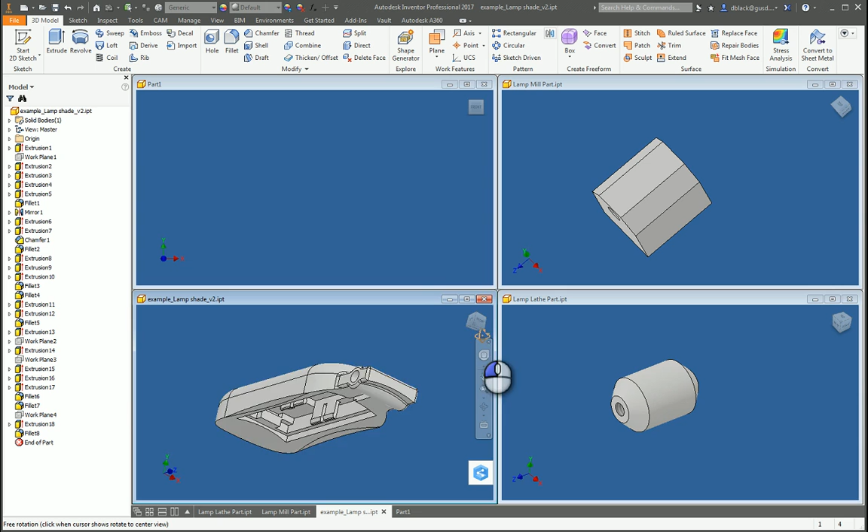Today we'll be designing the sheet metal structure of our lamp project, and you can see that we already have the lamp mill part open, and that model is provided, and we have the lamp lathe part open, and that model is provided, and we have the lamp shade that we've recently designed. And if you haven't designed yours quite yet, that's okay. You can still get started on the structure and then add the shade in later once you have it.

So with a brand new part file, let's go ahead and start designing the structure of our lamp. So I'd like to just start with a sketch on the front XY plane, and I think what I'll do is base my lamp link arms off of the design from a slot going center to center.

Now, you're certainly free to design the structure of your lamp in any way possible using any of these geometry features. We are going to be laser cutting it from thin steel or aluminum, and so long as you stick with a two-dimensional flat design, anything you can draw, we can cut it. But I'd like to keep this very simple for my project, and you can certainly bring in quite a bit more creativity to your project.

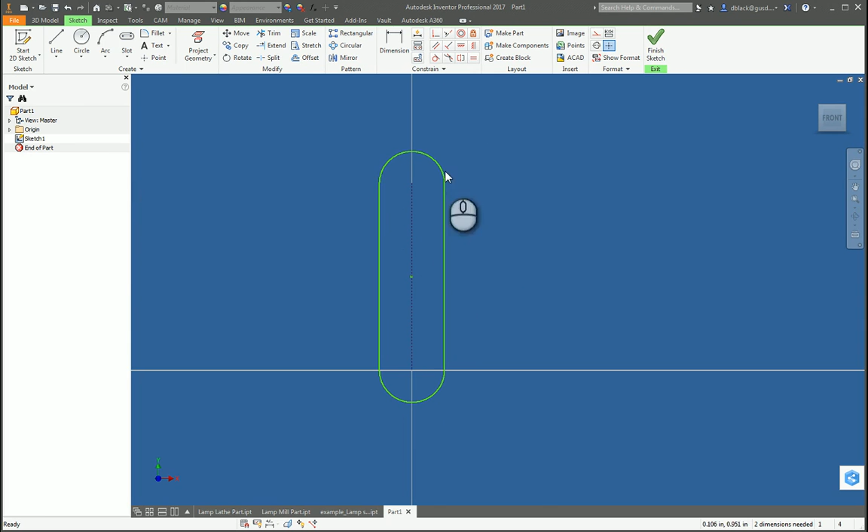So I'm just going to get the basic shape down of the link arm, which is this slot feature, and I'll go ahead and bring in a couple of circles to each end of the slot, and I'll draw them a little bit different sizes, but I know in the end they're going to be equal, so I'll apply an equals sketch constraint to these, and I'll go ahead and give them a dimension of 0.27.

I think that'll work well as a clearance for a 1/4 bolt, which has a major diameter of just under a 1/4 inch, 0.25, so 0.27 should clear that nicely. Now, for the size of the link arm, how big should we go? Let's keep it reasonable. I'm looking here at a ruler in front of me on my desk.

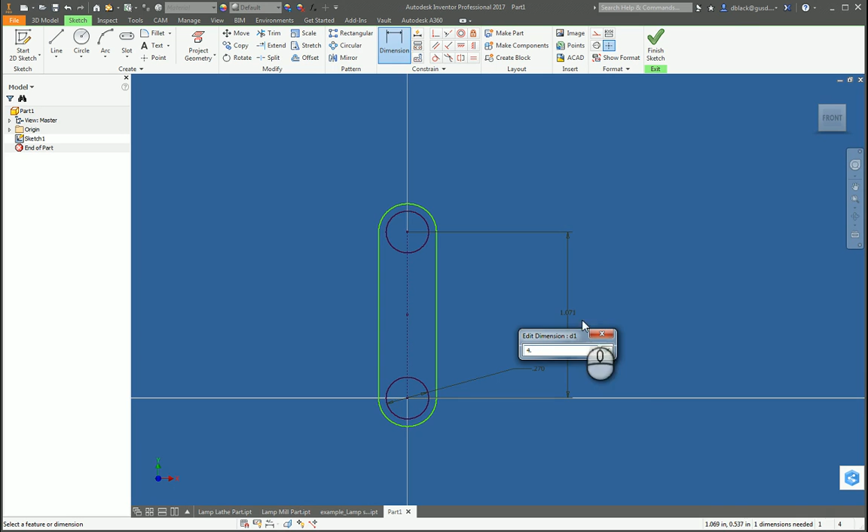I think we'll start out with about 4 or 5 inches or so, and we'll see how it goes from there. I'm thinking maybe a couple of 4-inch link arms will ultimately give our lamp a height of somewhere around 8 inches or so, which should be good for the size of LED module we're using. So there's 4 inches center to center, so overall the link arm is coming out a bit longer than that, and we can go ahead and give it a width here.

And again, looking at the ruler or caliper in front of me, I think a good size for the style I'm going for with my lamp is going to be somewhere in the neighborhood of maybe 1 inch or 1 1/4 inch. I think I will try 1 inch. And we'll see how that turns out.

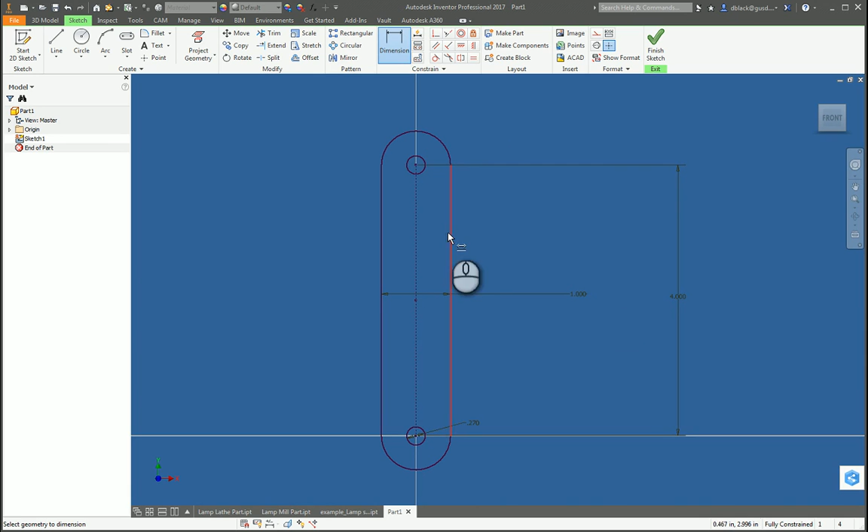Now, already I'm getting a little concerned that these ends are bigger than what may fit up with the mill part and my 3D printed lamp shade. I'm not sure that I've left enough space to have that big of a radius down toward the end. So already I'm starting to rethink this design. I might go for a narrower slot shape, or alternatively I might go for a little bit of a different design altogether, which is what I'm thinking at the moment. So let me go ahead and delete the slot features.

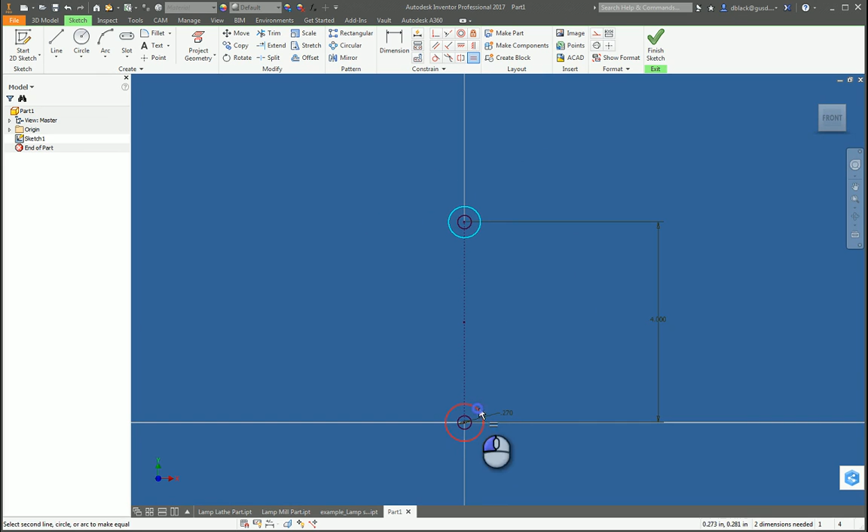So really the essence of what I've started with is 2 holes, each of diameter 0.27, and they're located about 4 inches apart, which looks good for our size and scale of design. So next, I'd like to bring in a couple more circles at those same centers to give me my outer profile. So I just made those equal, and I'd like to keep those in the neighborhood of maybe 0.5 or 5/8, 0.625. I think I'd like to try that.

And I'm getting some ideas about the style of my design. I'm thinking that I'll use lines, and I'm going to snap this line to the circle, but I'd like to not snap it right to this side point here. I'd like to place it at more of an arbitrary location on the circle so that I can use constraints later to bring it in the way I'd like.

In fact, I'll do that up here, and you can see it's chopping through the circle a little bit. Let me use a little bit of a different technique down here. For this one, I'm going to drop that line just out in space, trying not to snap it to anything whatsoever.

And I'll go ahead and do the same things over here. In fact, I think it might be simpler for me to just drop them out in space like this. And I'm going to come back with some tangent constraints. Tangent is just a nice way to make everything smooth and aligned. A lot of engineered and well-designed products have tangent lines and curves. That one looks like it went in nicely.

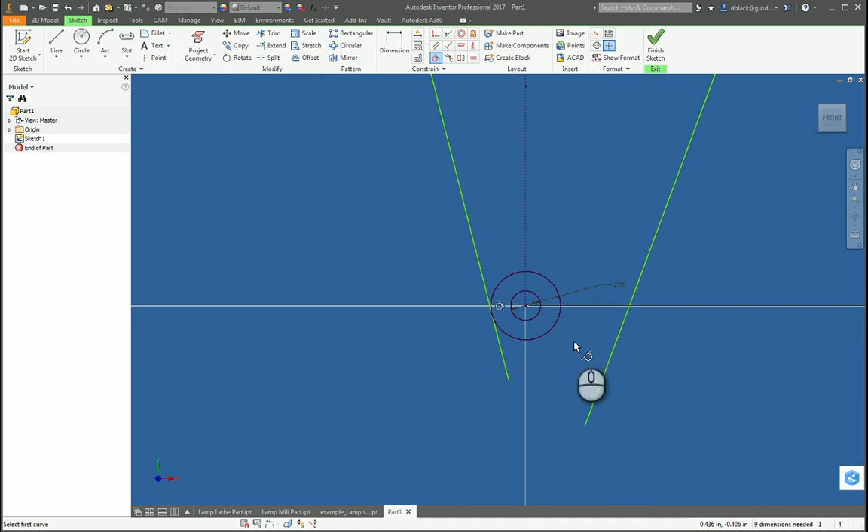You do have to check sometimes to make sure that you're not cutting across the circle with a chord as a segment of your line. I'll go ahead and make this one tangent, and notice I drew my lines a little bit longer than the circle, so I'll have to come back and trim them later, which is not a problem. And we're making everything nice and tangent here, and that looks good. So we'll come in with the trim tool, which is keyboard shortcut X, and we'll just trim all these right to length.

So I'm getting an idea for this sort of diamond-shaped link arm that's maybe narrower out here toward the ends, 5/8, and perhaps wider in the middle, so it's a beam. And I haven't decided really if I'd like to do something sort of abstract like this, or if I'd like to kick it back in like this, almost in more of a boomerang shape. And it looks like I might have snapped to a construction line there by accident, so I'll Control-Z a couple times on that. So I'm just taking that point and I'm seeing what I like.

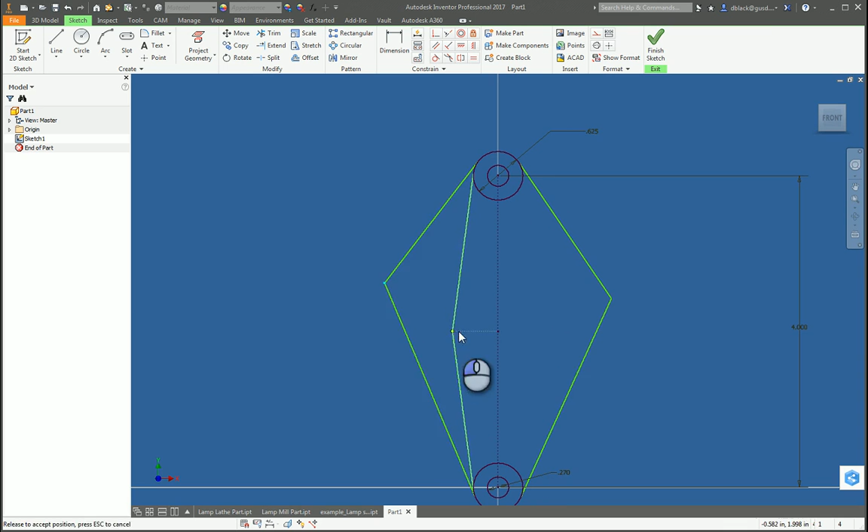It's really my choice of what design style I use to connect those two link points. We literally can put just about anything in between. I'm thinking I'd like to keep sort of a narrow diamond shape for my design, and I snapped these right down to horizontal with the midpoint of that construction line. And that construction line is an artifact that's left over from when I drew the slot, but you could certainly draw a similar such line on your own, joining your two circles together.

It should be noted that mouse snaps are actually not a hard snap. I can still move that later. So what you may want to do is come up here and use a horizontal constraint to get that center point aligned with your midpoint. And if you're on the top sketch plane, that would probably be a vertical constraint.

Next, I think I'd like to make all these equal length. Symmetry is a nice thing sometimes. So we'll go ahead and do that. And I think these might already be, by definition, yes. Adding this constraint will over-constrain the sketch. So it shows me in the lower right that one dimension is needed, and we can sort of pick and pull things apart and see what dimension that is, and it's just this way.

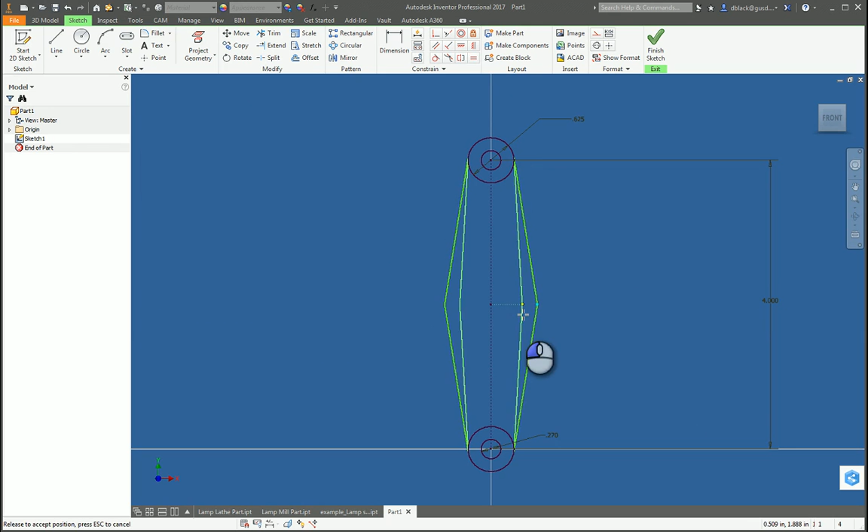So I think I'll go ahead and put a dimension that way for myself. I'm going to look again to my caliper or ruler here. Let's call it, in my design, I think I will stick with that 1 1/4 inches that I was going for in the first place. So that gives me some nice scale here. And I can go ahead and just extrude out this shape as is. It is 3 regions, so I'll have to pick it.

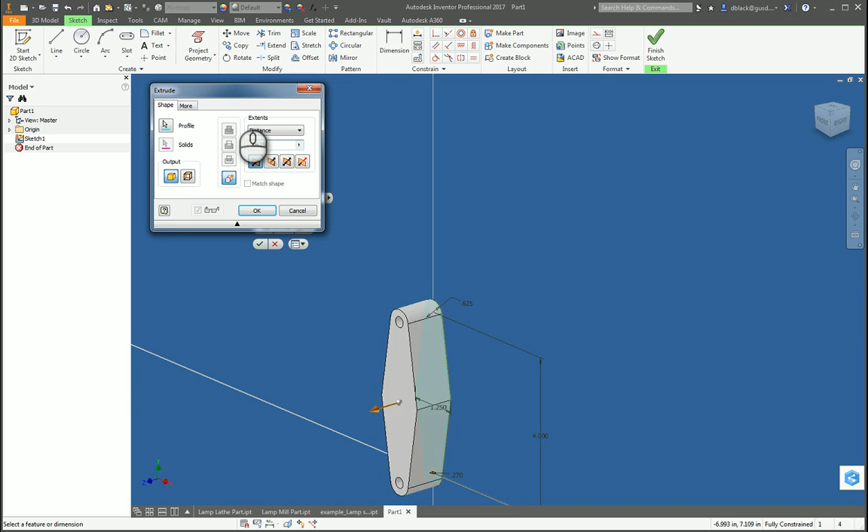Now, the thickness of your extrusion in CAD technically doesn't really affect how your part turns out in the laser cutting process, but we want to have our CAD model match the actual material we're going to be cutting. We do have 0.060 thickness steel, but chances are we'll do these link arm parts out of 1/16 aluminum, which is 0.0625. It's completely reasonable to round that to 0.063, or really even 0.06 if you wanted. This application is not too specific.

However, if we were doing bent sheet metal, we would need that perfect and consistent throughout. But I'll go ahead with 0.063 as a very close representation of 1/16 of an inch, the actual thickness of the aluminum that I intend to use for this project.

So I have the essential structure of my link arm modeled in just under 10 minutes, and it has a little bit of artistic style, but we are putting this into quite an advanced laser cutter, so we might as well add a bit more style to it. So I'm going to start a new sketch right on top of my solid shape, and it is important to not do too much in one sketch.

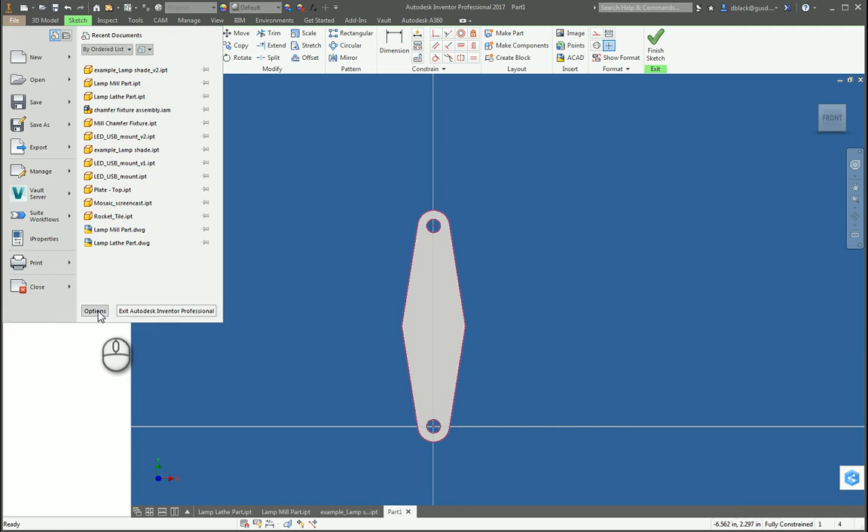I'll go ahead and project all the geometry I have, and if you haven't set those options in your application yet, go ahead up to your File menu and choose Options, and there's a couple of defaults that I'm not crazy about under this Sketch tab. By default, Auto Project Edges during curve creation is turned on, and I really don't like that. And there's another option called Auto Project Edges for sketch creation and edit.

That one's okay, but I tend to leave them both off so that I can choose which edges I want to project or include. The one I do leave on is Auto Project Part Origin on Sketch Create. I do leave it on just like this. So we projected our edges from our shape.

Now I think I'd like to potentially try using the Offset tool to keep a thin web around the outside. And I see I have that here. So it's giving me a choice of how far in I bring that offset, because I'd like a shape that is something like this. So I'm going to offset mine maybe 1/4 inch and see how that looks. And it's all locked down because it just is offset.

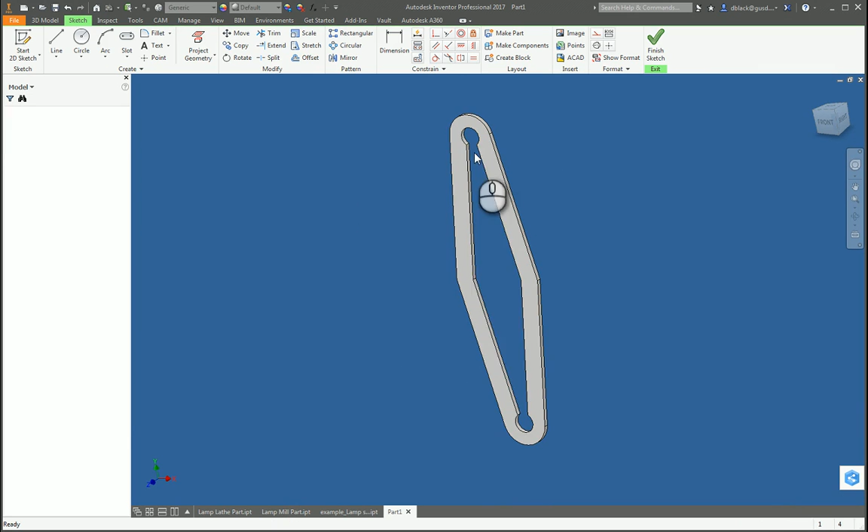Now if I straight went to extrude this, I'd have a little bit of a problem in that it goes all the way through to the holes, and I need to keep some material there for the pivot points on my link arms. So I'm going to undo that and back that up a minute. And I think what I'd like to do is bring in some more circles, perhaps even similarly to what I had before, right up to my part. That looks pretty good there.

So I can do a bit of trimming with the geometry. I'm not sure why this one is still green. It looks like it didn't do a hard snap for me. So I can go ahead with an equals and say the radius of this circle needs to equal the radius of this arc. Now everything is fully constrained, which we really like to see in good, proper sketches.

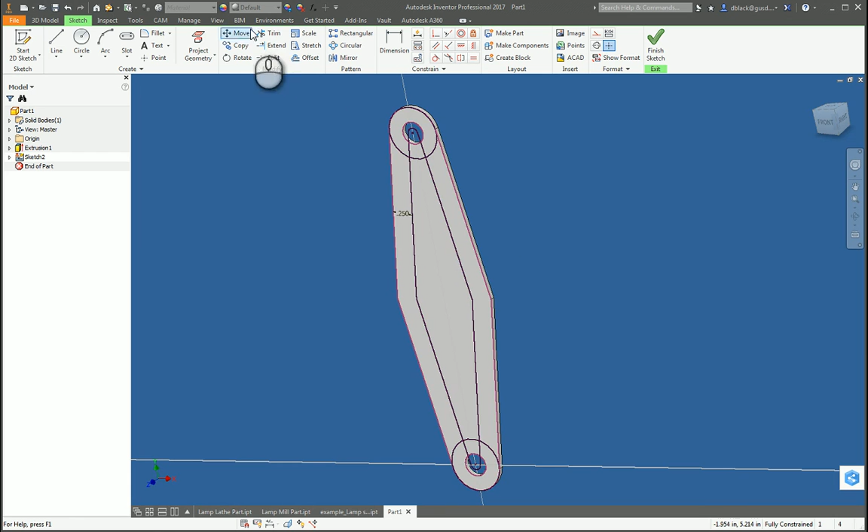So I could come back and extrude this region out, but it still looks like it's not picking. And if I hold my mouse long enough, sometimes I'll get a select other option, but it looks like right now this is my only option. So I may need to come in with the trim tool and take out some of these areas here. And we have to be careful not to move our geometry past this point, because you saw it went from black to green when I trimmed it, so it's no longer well constrained and it can move around on you.

So I'm trimming these lines. Sometimes Inventor doesn't really like extruding certain regions if the lines extend and cross others. So let's try it from here, and it looks like I can get that region through the part with no trouble. Now this looks okay. I think I would like the style of this design, and the laser is capable of cutting these sharp corners, unlike a router or something of that sort.

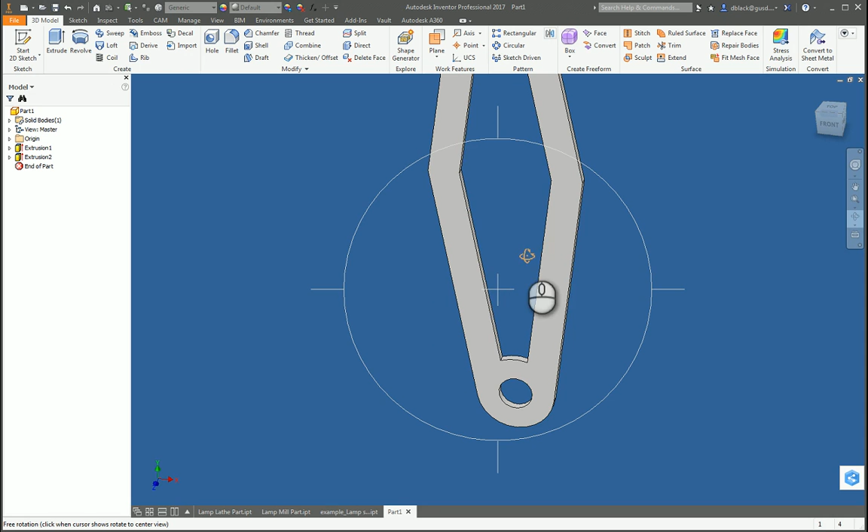But in engineering design, sharp corners do lead to stress concentrations, stress risers. So I'd like to come in and put some fillets in those corners, and I might even experiment with adding a little bit more style to the design of this part. So I'm going to do that back in the same sketch, actually. And you know, I might even Control Z back to where that was just an offset shape that was not trimmed, and I do have the circles in there.

And I think I might like to try doing some sort of pattern like a truss, like this, which I think looks kind of cool in the design. So I need to see how we might do that. I can potentially try drawing a construction line, which is not going to be a hard solid line. It's just to help lay things out, and it's really subtle in this color mode, and I'll see if this zoom in gets captured on the video. It's a little dashed line there, and they're showing up yellow in the Millennium color scheme, and I'll go ahead and draw a few more in.

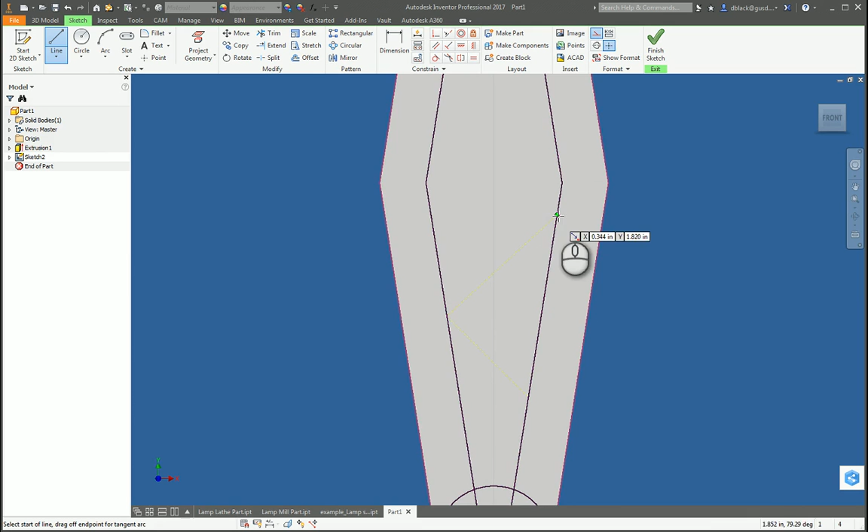And I do want there to be some sort of regularity to it. So I'm thinking the two in the middle should be equal length, and I'm thinking the two on the ends should also be equal length to each other, but not necessarily to the middle. In terms of angles, we can use a general dimension and just go from one of our geometry lines to the construction line, and I can put an angle in there. So let's call that, something similar to what I'm seeing, maybe 135 degrees.

I'm going to try to do a similar angle over here on this line, and I might bring the angle out this way and do the supplement of it, 180 minus 135, so we get 45 degrees. But that's off of a different line.

For some reason that doesn't look quite like I intended, so I'm going to Control Z that. That 35 there is closer to what I was looking for. So we have to keep in mind which line we are referencing.

Let's just, for the sake of it, look at this dimension here. Yeah, that's about 145. So I'm curious if that were 135. That just brings that a little tighter than I wanted to see.

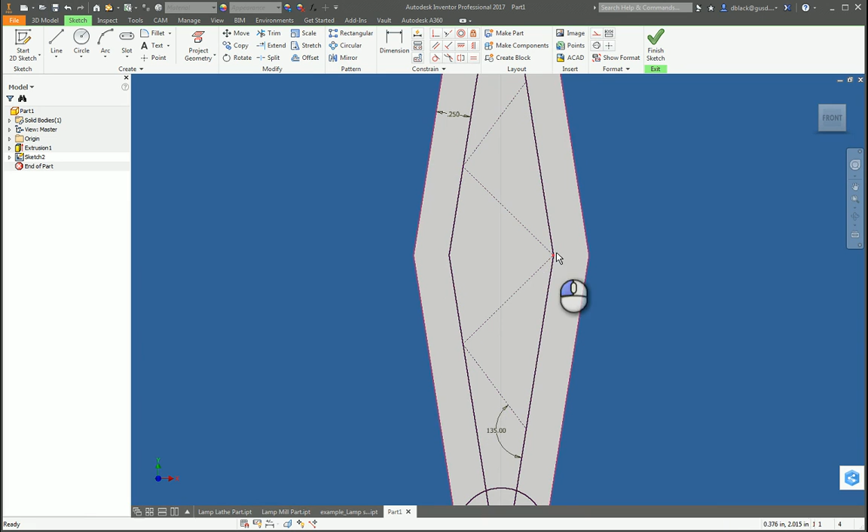So I need to rethink this a little bit in terms of how I draw it. I might just freehand it for a moment. Curious what happens if we snap that construction line there. So that becomes fully constrained.

These are super interesting, just by definition of length. So we had, I'll trace over, this construction line in red and this construction line in green defined as equal lengths. And then each of these in orange we had as equal lengths as well. So this actually ends up in a perfect symmetrical position about this yellow line, which I kind of like, and I think I might go with that.

So my construction lines are nice and locked in. Now I'd like to get some real geometry lines, so I'll turn off that construction, and I think the way I might do it is with an offset tool.

I'll offset from those construction lines over a distance. I'm thinking I might try to keep that 1/4 inch web thickness as sort of a theme throughout this part, but as I look at it, I realize the open areas in the part might be getting a little small. So before I do that, I'm going to change my 1/4 inch web to maybe simply 0.2, and that opens up the part just a little bit.

Now I'm going to offset from my construction lines by 0.1. You notice they extend a little longer, and that's okay, we can fix that. I'll offset this way by 0.1 as well. You'll notice these cross here, and that doesn't quite reach, but all of this is fixable in a moment.

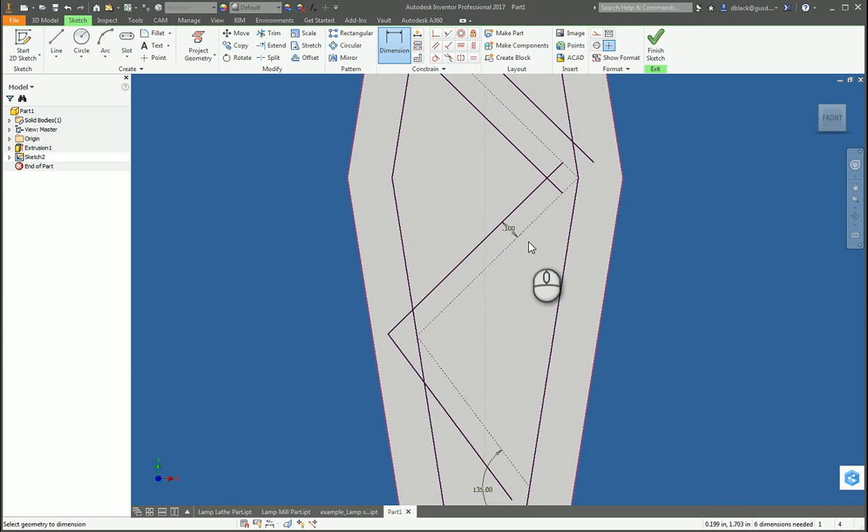So let's just continue offsetting. And I forgot the dimension on that one. We can drop that in with the D, General Dimension tool, 0.1. And we can drop our next offset line in and give it a 0.1 as well.

So this is looking like a pretty cool shape, and I'm happy with it. We do need to make these lines reach to the end, so I'm going to use the Extend tool to do that. You pick the line you want to extend, and more often than not, it'll take it right where you wanted to go.

So let's see, do we have any others we need to extend? Just one down here. You see the little highlight preview in green, and we're looking pretty good at that point.

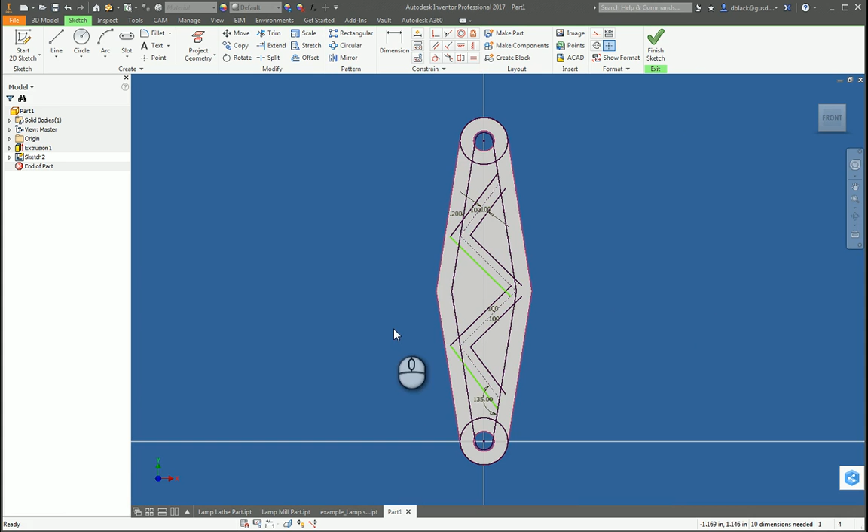Now we're no longer fully constrained, and we could certainly do some dimension work and get ourselves back to fully constrained. If this were a production part for a real engineering firm for a customer, we likely would make sure our sketches are fully constrained. But for a student artistic project, it really seems to be okay, and more trouble than it's worth to go constrain all of it.

So do know the difference. Proper practice is everything fully constrained in sketches. You don't want it moving on you like this. So we could certainly put that dimension back in, but we're going to go break quite a number more constraints here momentarily with the trim tool.

So let's go ahead and take this line out, and we want to get everything back real clean to where this will be a clean extrudable region. So we're taking these out. You have to kind of think of your design in terms of positive and negative space, what stays and what goes away.

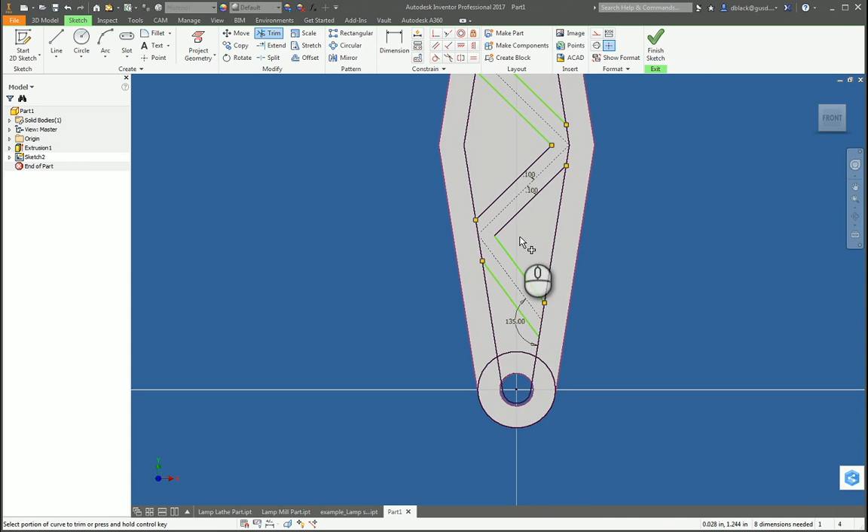Now some of you might be tempted to add fillets at this point in your sketch, and I would strongly recommend against that. It's much preferred to do fillets in the 3D space than in the 2D sketch environment.

So this looks pretty reasonable at the moment. I'm not confident that these green lines haven't moved, but we could check it with a measure tool, and indeed they're 0.2 inches apart like we intended. So this looks pretty good.

Let's see if we can extrude out. Nope, we still have that issue with that region leaking into the center where our pivot hole is. So let's do a couple more trims right up there, and now we see the whole sketch has gone green.

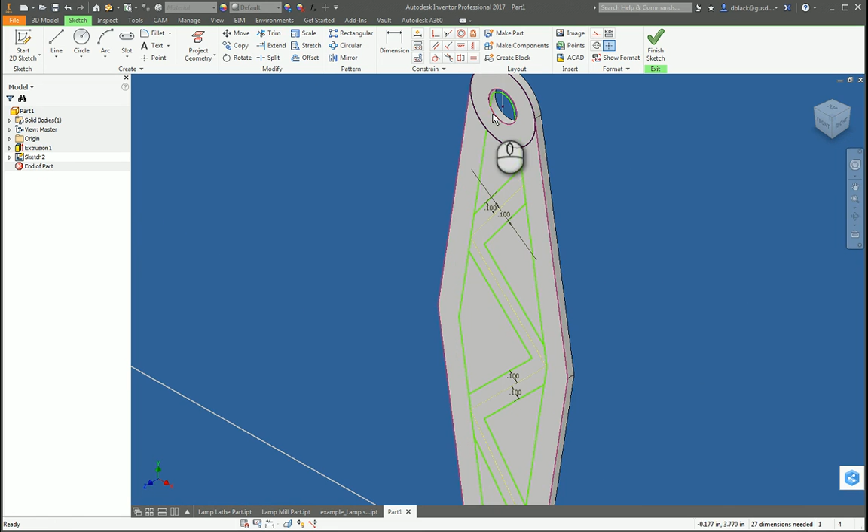So this would be quite a bit of work to bring this all back into fully constrained. It's one of those things where you draw your geometry with the constraints, get it in the right place, make sure it is, and after you start trimming, you're pretty much done in terms of being able to make future edits. It becomes quite difficult without breaking the whole sketch or adding a lot of constraints back in.

So these look like the right regions. Let's see if they can extrude. Indeed they can. Let's cut them through all, and that's looking pretty good.

So again, in a real engineered design, we would do some finite element analysis on this or something to optimize the position of the truss members. But for our design, we know it'll be plenty strong with the light loads on it, and we're mainly going for the aesthetic here. So at this point, let's go have some fun putting in our 3D fillets.

Let's just start with that 0.125 radius, and I'll get the most narrow one and see how far it brings it out. You'll see that really filled that region quite a bit, and I'm losing a substantial amount of the open areas in the model.

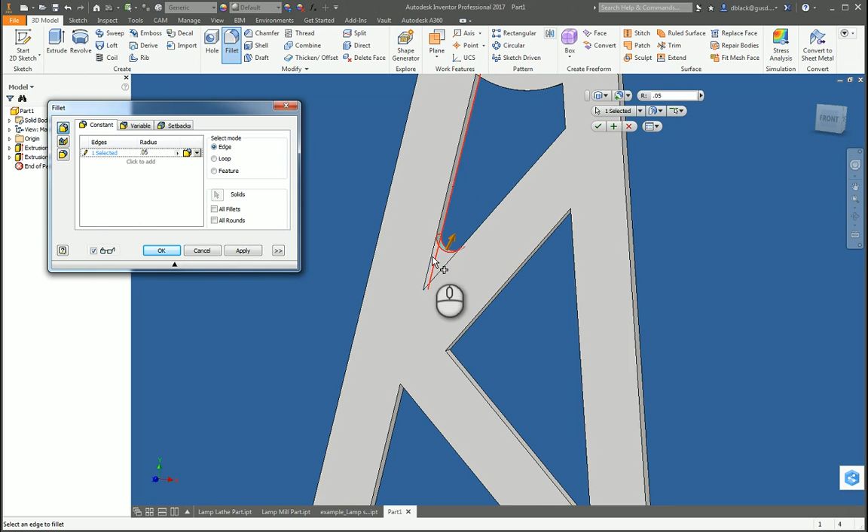So let's see if we can bring that radius back down to a little bit more reasonable number, a smaller radius, maybe 50 thou. And that gives us a nice radius but still keeps the look and appearance of our design.

So I think I'll just start putting these in. You do want to be careful about your mouse clicks, and if you hit one by mistake that you didn't mean to do, you can just hold the Control key and click that edge again. Control click is a deselect.

So just orbiting around, holding F4 on the keyboard and zooming in and out with your scroll wheel, and it'll zoom where you point it. You bring your mouse to that corner and zoom right in there, hold F4 and orbit around. You can get really good and fast at this with some practice.

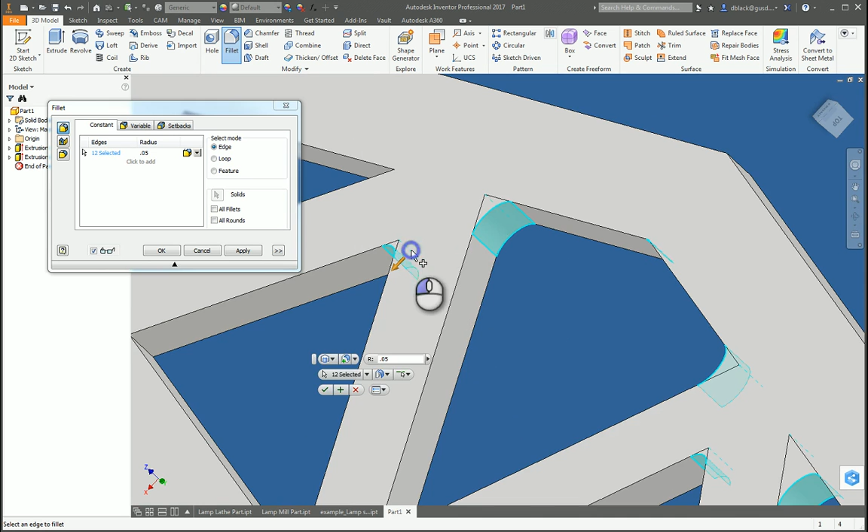So we're getting all our fillets in there. It's looking pretty good. You can even pick them through the backside like this, even if you can't see them directly, and that does work just fine.

I like giving myself a good view angle where I can pick them without accidentally selecting a different edge. And let's get this region up here.

Then you want to look at your number of fillets and say, okay, does that make sense for what I'm doing? If you got some odd number like 19 or 17, it might raise suspicion that you missed one. So you do want to look over your model, depending on your shape it could be an odd or even number, but check that it makes sense to you and that you didn't miss one, because it's very easy to do.

And we'll say apply, and that looks really great, actually.

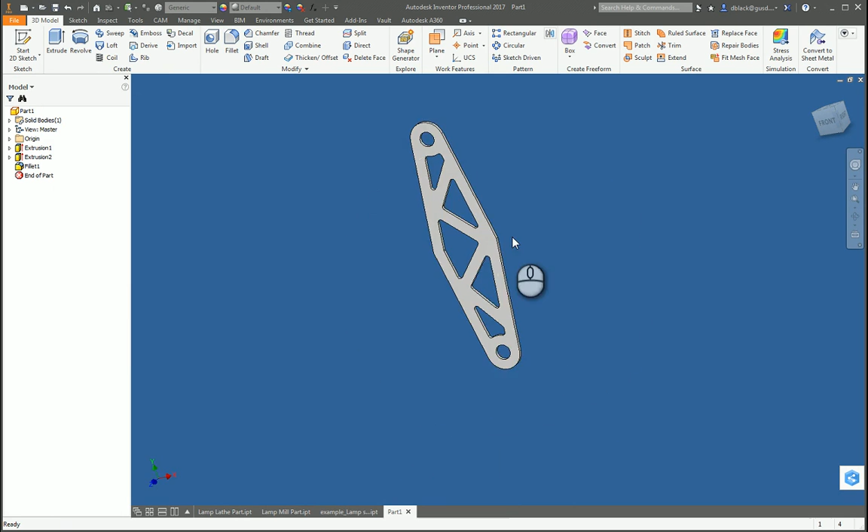The only last thing I'd like to do is put a little fillet right over these two surfaces, and I'm doing that as a separate feature because I might want it to be a different radius than what I used on the inside. You can see that's pretty small there.

Just for example, let's see what a 0.5 would look like, and I may even stick with that. I do like the appearance of that. So we have a nice truss beam here.

For the link arm for our lamp, I'm going to go ahead and celebrate with a save and call this link arm, and I'll give it a V1 just in case I come back and revise this at some point in the future. Let's go ahead and tile our windows down here. So again, we have our mill part, our lathe part, our shade, and yours might not exist yet, but that's okay. And I've got my link arm.

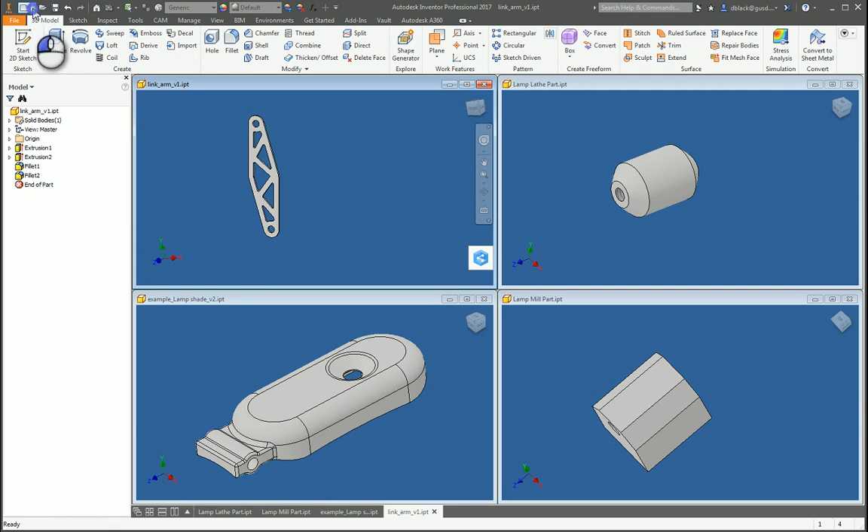The next thing I need to do is design the base of the lamp. So let's do a brand new part. Everything that's an individual part in real life does need to be an individual part in CAD. That's just a good modeling workflow. So we'll start a new sketch, and for orientation's sake, I'll go on the top plane, which looks to be the XZ, and it does rotate it 90, which is a little goofy to me, but we'll go with that.

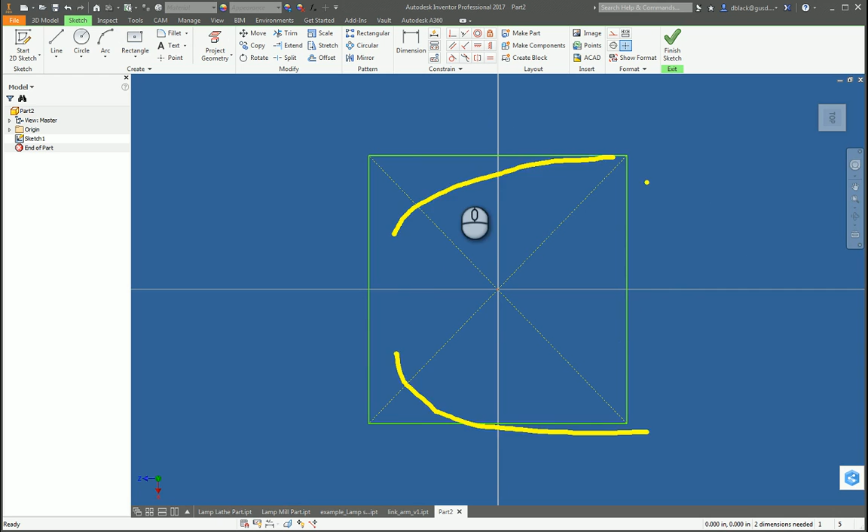We can do a lot with our shape of the base, and we can put some customization in there. I would say a center point rectangle is really basic. You could do some sort of wavy shape like this, maybe something shaped like a gear or a cam or something of the sort. You could bring a little style into it by curving some part of it. In fact, as I look at that, I think that might be neat if I brought in a curve shaped sort of like this. I think I might give that a try on my project.

But we can start with a rectangle, and I'm thinking a size of 4 inches ought to be adequate. And I would like mine to be basically square. Yours doesn't have to be, but since I'm going that way with mine, rather than putting a separate dimension over here, I'm just going to use an equal constraint from my sketch constraints and make that right into a square. I'll go ahead and extrude it out a distance of 0.06 or 0.063.

I haven't decided yet if I'll be going with steel for the base or aluminum, but nonetheless the DXF we export has no thickness, so either way should be fine in your model. You just want it to be reasonably accurate.

So let me try to do that sort of cutout shape by starting another sketch, and we'll project this geometry so I have it, and you see that as the dark purple or medium purple lines here in the Millennium color scheme. And I'm thinking I want to use maybe an arc to do it.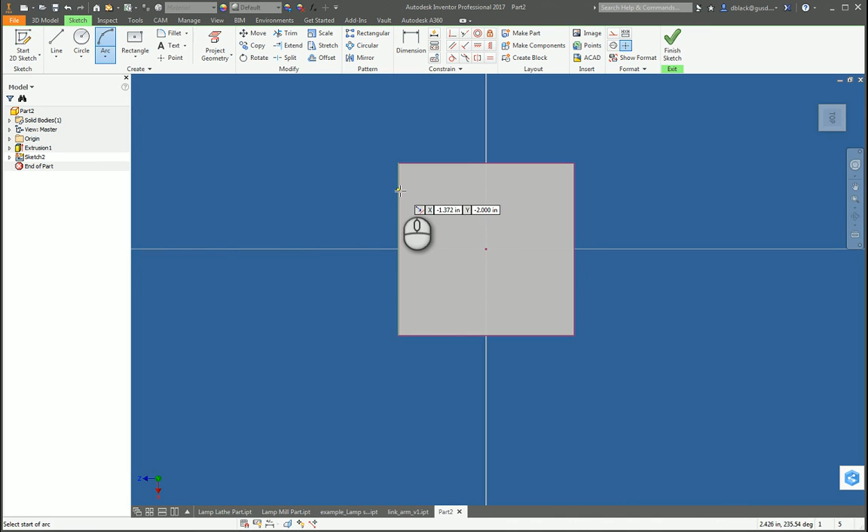So let's see if I were to anchor this here and here, and I was hoping for something more like a parabola. But a parabola is not a constant radius, so the arc tool won't do it, actually. That won't be suitable. There could potentially be a way to do it with a couple different radius arcs that are tangent to do some approximation. Splines I wouldn't recommend—at some point in the process, I believe they get converted to lines and arcs when we go to laser cut.

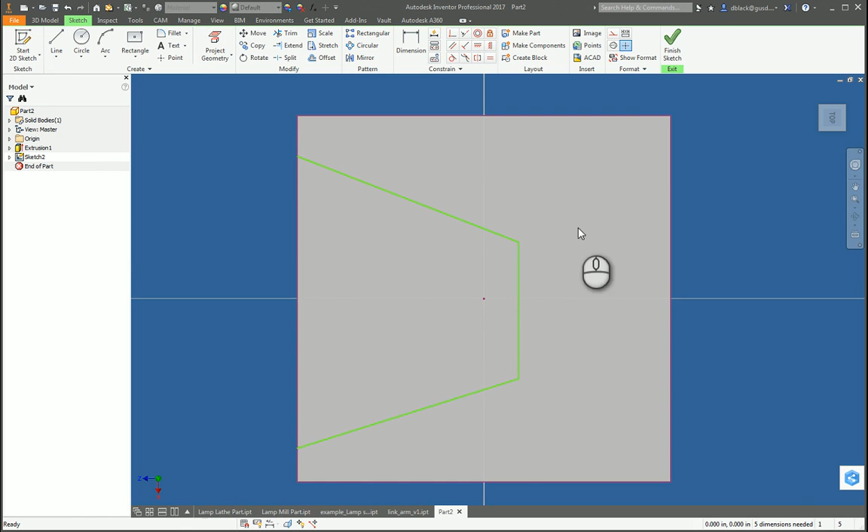So I might rethink this and just go with lines for a bit of a harder edge shape to my design, something like this. And what I'm looking at is this line really can be anywhere, and I need to control that. So I'm going to use one of these constraints, either horizontal or vertical, to get the center point of that line aligned with my sketch origin about which my square was created. So in this sketch orientation, the top is rotated, so it's actually vertical ends up horizontal as we look at it on the screen, and that looks pretty good.

The next thing I'd like to do is make sure these lines are equal length. Symmetry is a nice thing. And now we need to put some dimensions to it. So from this front edge, I'm going to come back, let's say 2.5 inches, and I'd like this line to be maybe 1.5 inches wide. Let's see what would happen if we took that back. No, I think I'll stick with that. I do like how that looks.

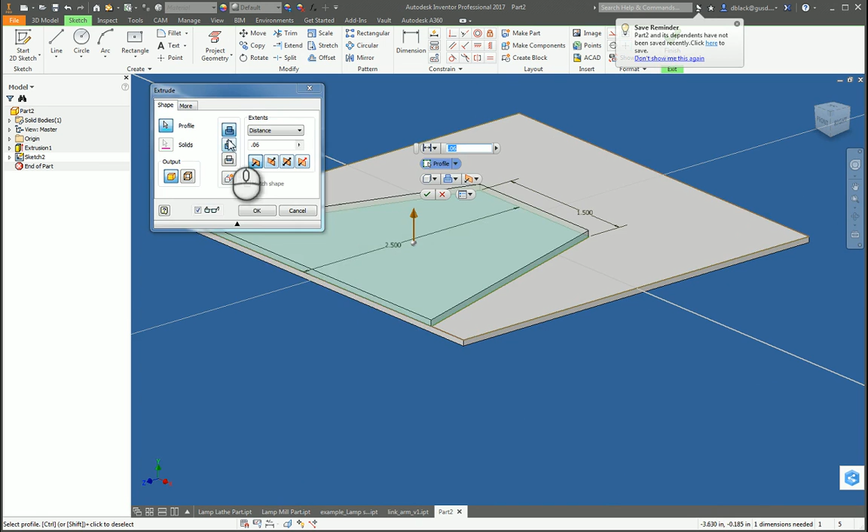So I'm pretty happy with this. Let's see if we can extrude cut it out. That looks pretty good. So I can do some more—I can put some fillets in it, or on it. Whoops, not the whole feature. Fillets is what we were going for there, and we can certainly pick them. The sheet metal cut to a sharp corner is going to end up pretty sharp, so you do want to fillet your edges to some degree.

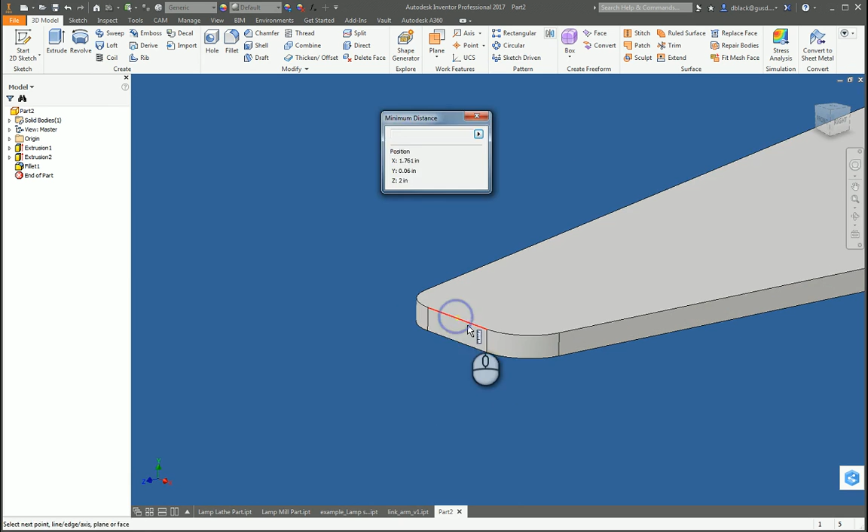Okay, and I like what I see. So something like this is going to be the base for the structure, rather, of my lamp. Now, I want to measure the front part here. Whoops, M for measure. 228. I do have some little rubber feet we're going to put on there. And I'm thinking that maybe should be a little bit wider so I can get those rubber feet all the way out toward the front. That's hardly a 1/4 inch wide.

So let me go back to my sketch. And in fact, we are not quite defined on that yet. So let me put in one more dimension from the side to this line here of, let's try 0.5. And with our fillets, that should leave us a good 282 in that region, which I think is just fine. So I kind of like the design. It's looking pretty good. I'm going to go ahead and celebrate with a save, and I'll call that my lamp base V1.

Okay, we're almost ready to build the bulk of our lamp here. So we now have our lathe part, our mill part, our link arm, and we'll have several copies of that. And then our base and our shade, perhaps, if you've modeled it already. If not, that's okay. So at this point, I feel like we're ready to make an assembly. So I'll make a new assembly. And to place the parts, I like to just tile the windows and bring each one in there.

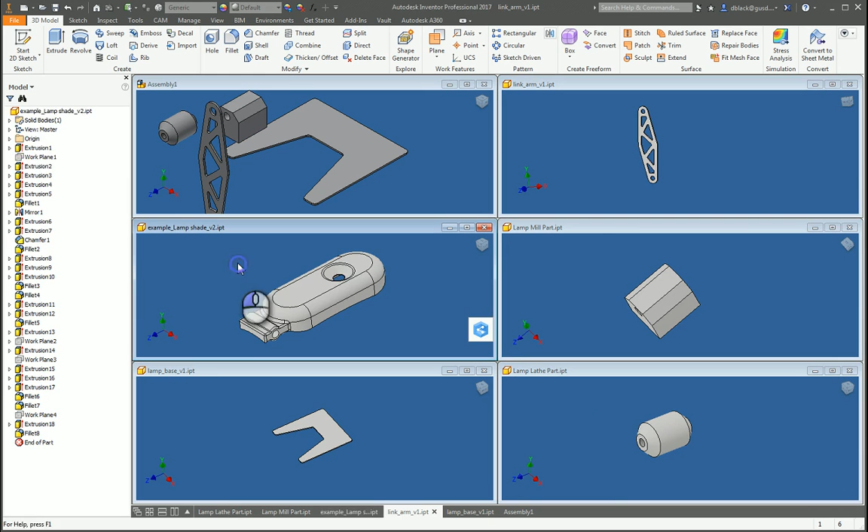So we'll start with the base, and we'll just drag it from the browser, and that's now in our assembly. We'll get our mill part, and we'll drag that in. We'll get our lathe part. We'll drag that in. And we'll get our link arm, and I can put a few of those later. And I'll get my shade. I don't need it yet, but we'll need it eventually. So I got all my parts placed in, and I'll come back to my assembly. Alternatively, you can use the place tool, but you'll have to browse for it.

The first thing I want to do is get some of these out of the way. But then I really want to join the mill part to the base. So I'm thinking that I need to ground the base, which it already is, as indicated by this little push pin icon. And then I need to use a constraint to select the top of the base, and I'll orbit around and select the bottom of the mill part, and I'll say apply.

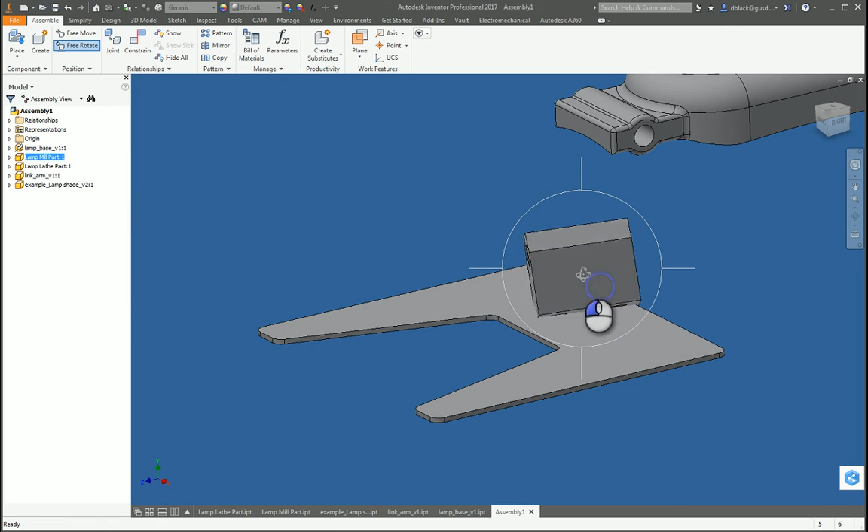The next thing I need to do is get the orientation right. And I need to get them kind of lined up. I want this thing spun around this way and sort of centered toward the back of the base of my lamp. So I think what I'll do is actually mate this flush with the back edge. Now, if you don't have a straight edge on the base of your lamp, you'll need to do something different with where you constrain it to, and I will leave it up to you to make that work.

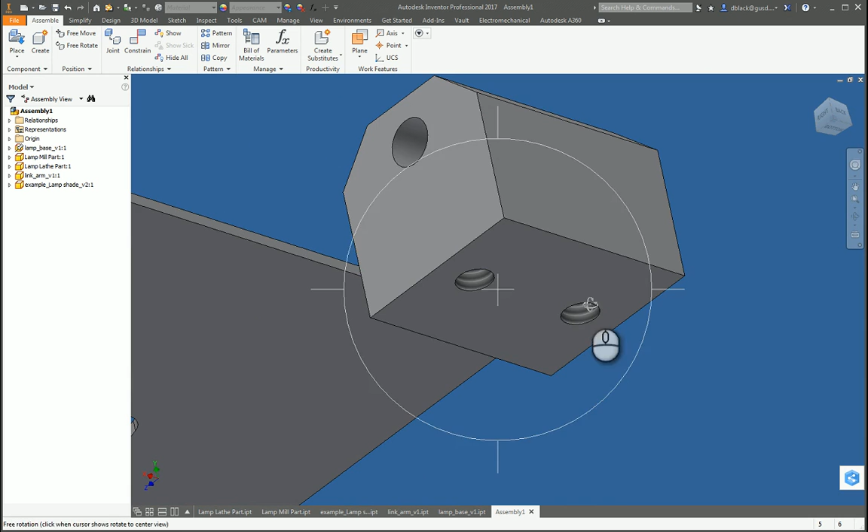One technique is, let's move this out of the way temporarily. Oh, that's not moving for us. Let's move this one. You could model the couple of holes in your base plate that are a match to the mill part, and I believe that's 0.7 on centers. Yes. So if you did that, then you could constrain right to the holes. I didn't know exactly where to put the holes when I was designing the base, so I'm going to get the mill part all constrained in and then model the holes adaptively.

So we want this centered. The best easy way to do that is with a work plane. So I'm going to open the mill part. In fact, it's already open, but that'll just bring us back to the right tab. And I'm going to give myself a mid-plane between two planes. From here, orbit around to here. Now we have that nice work plane right in the middle.

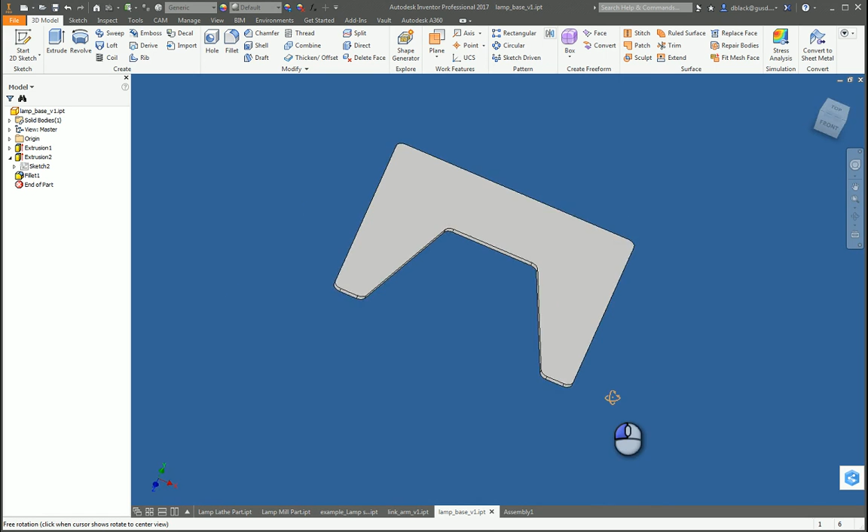Now on my base plate, I'm going to maybe do the same thing. Let's see. I have these sides as purely rectangular, which is okay. I'm not sure if I want to keep it that way or not. I'm looking at the style of this, and I can't help but thinking that this would look pretty cool if it came back about like that.

So I'm thinking I'm going to make that change now on my model. I'm noticing these fillets are no longer going to be needed. I'll just go right ahead and edit and get rid of them. Not a crucial step, but that's just part of a person's style in modeling and being particular about things like that.

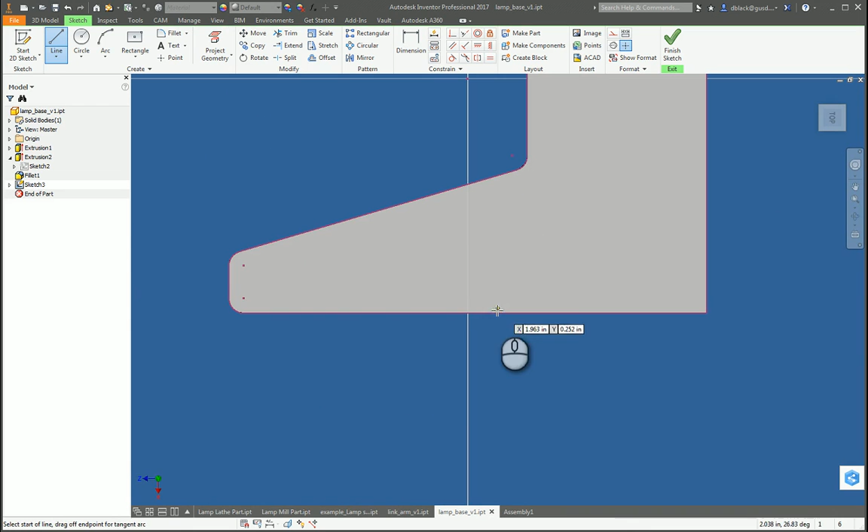So let's start a new sketch up on here, and I'd like to project everything I already have, and I'll go ahead and make a line out to here, and I'll do the same over on this side. It is a symmetrical part. We could have drawn half of it and mirrored it, but I like to visualize the whole thing at once. Let's use a parallel constraint from here to here, and they don't have to be parallel. Again, that's just a design choice I am making, and for the sake of symmetry, let's make them equal.

That looks good. And I think we only need one dimension remaining now, which could be from really anywhere to one of the endpoints of this line. And I'm thinking 0.7 looks about like what I'd like, and I'll cut these corners out. Okay, I kind of like this shape. I need to go ahead and throw some fillets back on there. I don't recall what radius I used before. Looks like 0.125, and I think I'll stay consistent about that.

And I have 4 of them to go get. That's 3, and I'll pick this one from the back side. There's 4. So we have our fillets, and we can come back to our assembly and see that everything's updated. It's always a good idea to hit that lightning bolt icon if you've made changes.

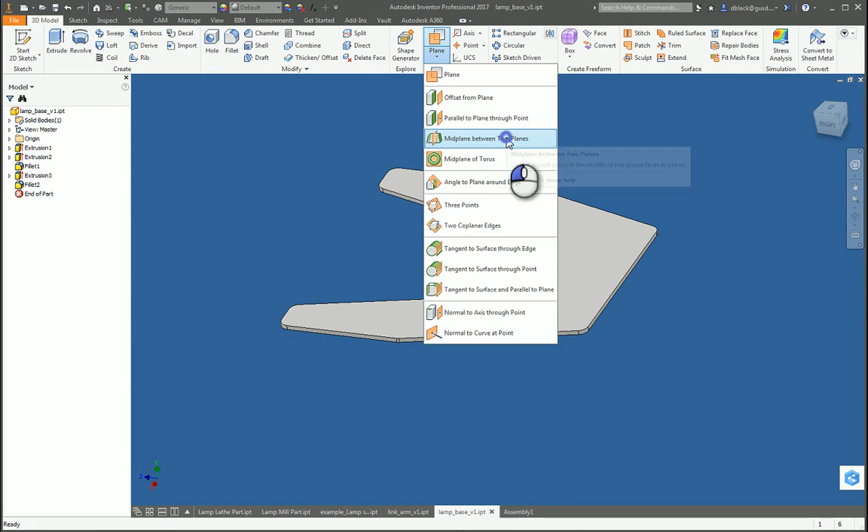So we were getting this positioned this way, and we need a work plane on our lamp base. So back to the base, let's make a plane as a mid plane between 2 planes. And these are actually still parallel, so I can go between there and there. So I've got a nice mid-plane, and what that allows me to do in my assembly is simply constrain the 2 planes together.

Work planes in Inventor have a yellow side and orange side, so it looks like these planes are going opposite directions, yellow and orange, so they should constrain right together for me, and they do. If that doesn't work out for you, you might need to try the flush solution on your constraint. So that looks great. Everything's lined up. We need to get those mounting holes in.

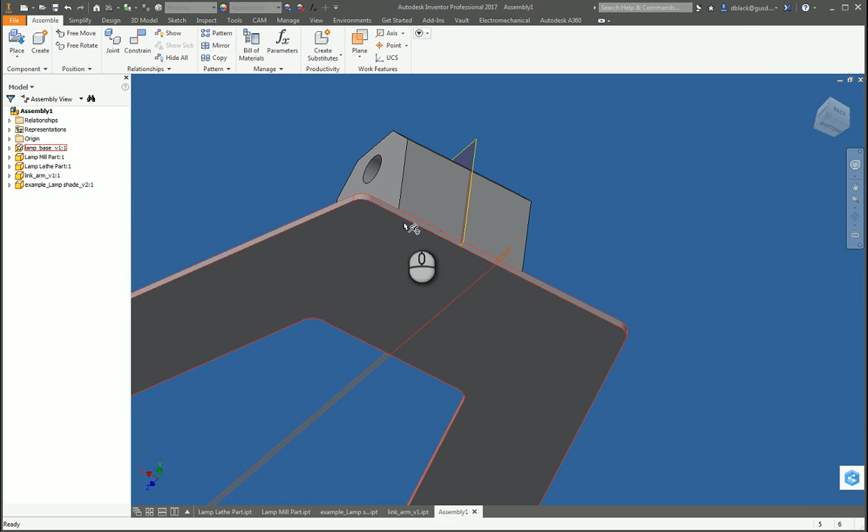So now I'm going to save the base and close it, and we'll do in-context editing. We're going to be editing the base plate from within the assembly, either by double-clicking or by right-clicking and saying Edit. And you can only edit a part in one place, so if you're doing it in the assembly, you only get that option when your part is closed and not open on one of the tabs down at the bottom of your window.

So we're editing the part. It's white in our browser. The other things are grayed out and kind of ghosted out in the background here. We'll go ahead and sketch on it, and I'll orbit around a little bit. And I'm going to project geometry, and we can kind of hunt and hover with the mouse and see if it picks it up, and it looks like we're getting it there. Is that the one? Let's try it. It indeed looks like that's the one.

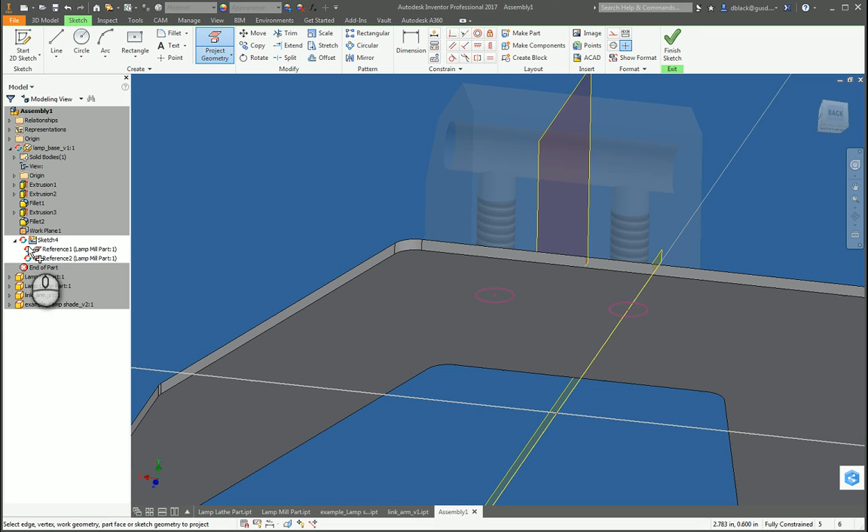But I'm wondering what happened to my constraint here. My work planes are no longer aligned. So a slip of the keyboard may have caused that to undo, but that's okay, because now that this geometry is adaptive, as indicated by these red and teal circular arrows, when we go to update those work planes, those holes will move with us because we've projected the geometry from one part onto the other part in our assembly, creating those adaptive links or adaptive references.

Let's finish that sketch. Let's return to our assembly. Indeed, the work planes are off. This is still, I believe it to be free moving, but because of that adaptive link, it no longer will drag freely. So let's try to put that constraint back in between our work planes and apply it. And it moved into place, and the holes went with it, and they're perfectly in the right place.

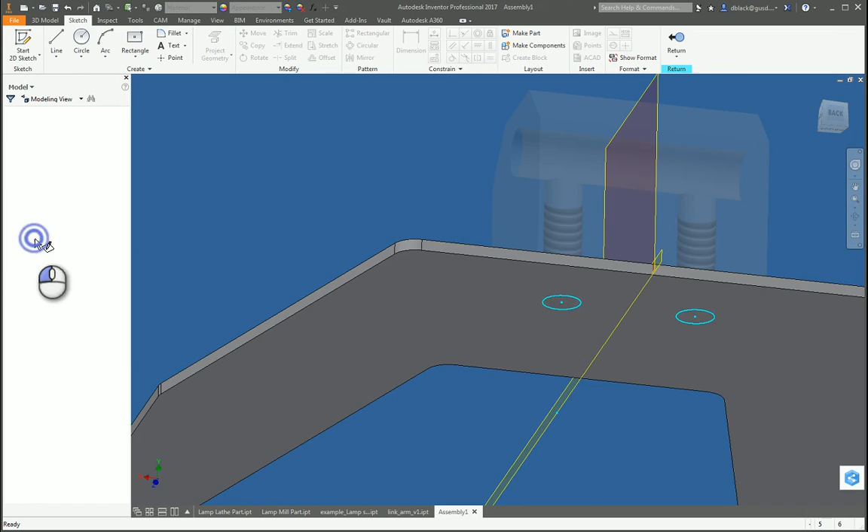So I'll get back into editing the base plate once more with a double click. We'll say E. Oh, not quite yet. What's the diameter of these holes? Only 0.196. Not enough for our 1/4-inch bolt to fit through. Let's get our sketch circle, and I think we need to get actually back into that sketch. Double click, we're editing the sketch, we're making a circle, we're bringing it out larger. Alternatively, you could use the hole tool, but for just a couple of them, a lot of times I like to draw the circle in the sketch and extrude it.

We know these will be equal size, and let's put a dimension of 0.27. Looks good. That's a clearance for our 1/4 inch bolt. Make sure you take the whole thing when you extrude it, and we'll cut it through all, and that only relates to this part. So we'll say OK and return, and we can see that the holes in our base plate are perfectly aligned with our mill part.

Now from this point, it's just putting our lamp together. So let's go to town, constraining our link arm. I'm going to go axis to axis. Looks good. And let's escape and bring it out. I need 3 more link arms. Control C, Control V, V, V, holding the Control key so I have them all. Let's get our shade out of our way.

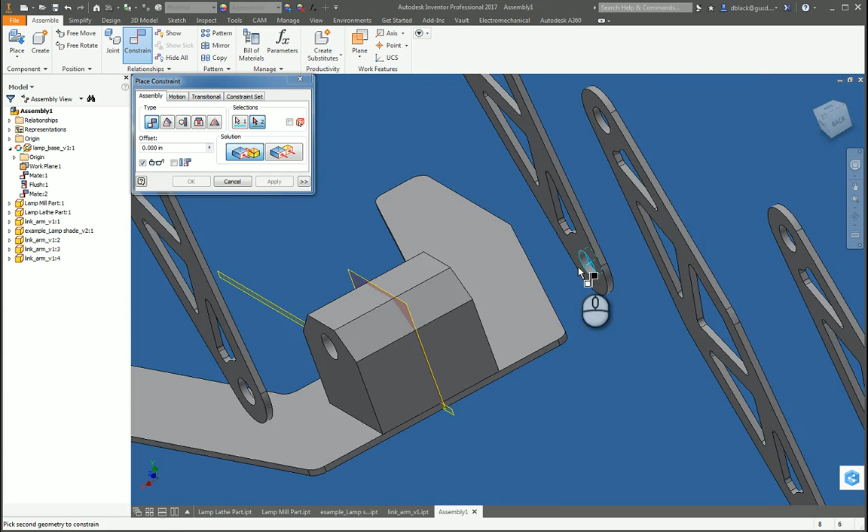Let's constrain the next link arm, axis, and you pick it from the inside of the cylinder, and you see that dashed line to indicate axis. You come around, and we'll get the axis of that hole and apply it. Might as well get the 2 tops of these while I'm in here, axis to axis, and apply. And that's looking good. We need to keep them from sliding apart, so let's constrain the face of the mill block to the inner face of our link arm.

And apply. I was just looking to make sure I had the link arm flipped around the right way. If we didn't, let's see what would happen. If we were this way, our features would not align. And maybe you want that for style, but in my style I want them to align. So there we have it.

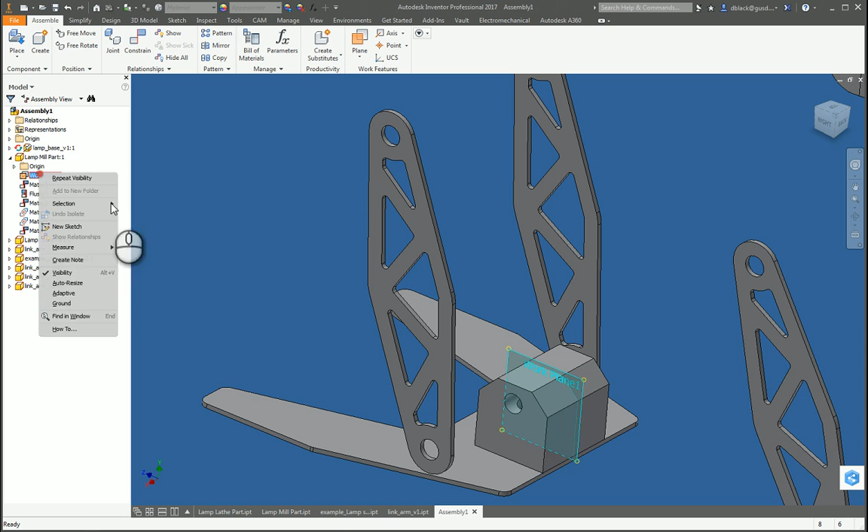Let's constrain the face. Oops, we're picking all these work planes. We can maybe turn them off so they're not visible. That one's in the mill part. Okay, and let's constrain the face of the block to the face of the link arm and apply. So that's looking really good. Let's bring in our next 2 link arms.

We'll go axis of the hole to axis of the hole, and while I'm up here, let me go ahead and get axis of this guy to axis of this guy and apply and escape, and it's looking pretty good. Making sure things are lined up, and we'll get these axis to axis. Whoops, I think I picked a center point there. It'll work, but that really is only a point constraint. In real life, if it's axis to axis, it's good practice to go with an axis mate.

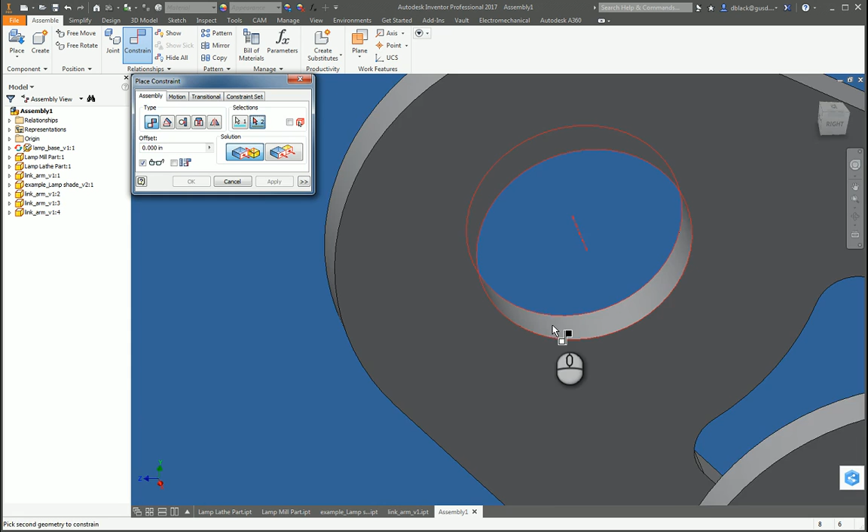Apply. You might get some degrees of freedom in your model that you didn't want if you don't go by axis. So speaking of that, these are still moving in and out. Let's get them right up against these inner link arms. Apply, face to face, and apply. This is looking really good at this point, and you might get some goofiness in which way it wants to go, and that's fine. It's free in Inventor right now.

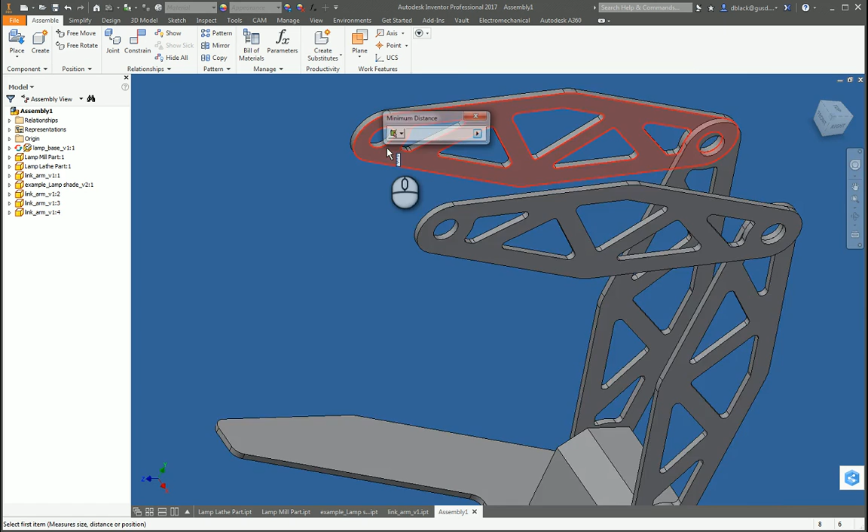Now I do want to bring your attention out to one area, and that's the space between these link arms. If we press M on our keyboard and measure in there, we're going to get 1.32, and I'm a little high here, 1.326, because I went 0.063 on my material thickness.

In our other video on designing the lampshade, we told everybody to be sure to go 1.32 on the width of the mounting feature on the lampshade. So you'll see that's a match. If we're a few thou off, in this case everything is flexible enough, we're in tolerance, it's going to work out. But you do want to keep that pretty close to the same.

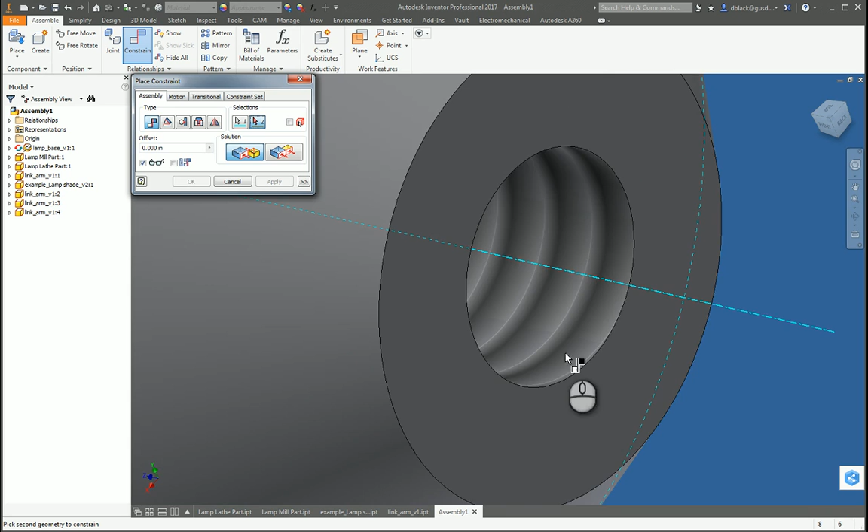Let's go ahead and constrain our lathe part in. Let's get the axis from the outside. If you have a modeled thread feature, it's possible to pick up a different axis. These are cosmetic threads from the hole feature, but still good practice. Grab it from the outside. The hole on the inside is coaxial.

And let's just take it to the axis of this one, and we'll take the face of the end of the lathe part right around to the inner face of our link arm and apply it. So this is looking pretty good. Let's use G as a free rotate, and that's not a hold, you just have to hit it once. And we'll orbit that around, we'll rotate that around and get this ready to constrain.

C for constrain, axis to axis. We're getting lots of practice in those axial mates. And this is still free to slide sideways, we see that there. So let's lock it down with a constraint from the face to the face and apply.

And if we did go look at this really close, you'd see just the tiniest gap over here. We're talking 0.006 of an inch. That's about the thickness of a sheet of paper. So not significant in this project. So I'm pretty happy with this.

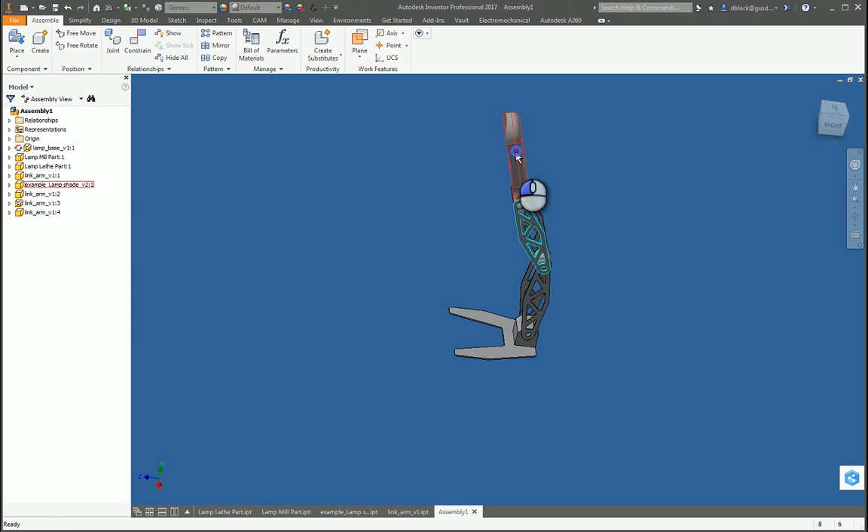The actual orientation that I plan to use it might look something more like this. And its reach is really just a function of the length of the base. If you're really looking to do an amazing job with this project, you could actually determine for yourself, using Inventor, if the lamp will fall over when outstretched.

The way you would do it is you would have to set all your material properties, and once you did, you could come up here to, let's see, is it under inspect? We're looking for center of gravity. It might be analyze or something of that sort. Let's take a quick look through. Inspect, tools. Center of gravity is in here. I don't recall exactly, oh, there it is.

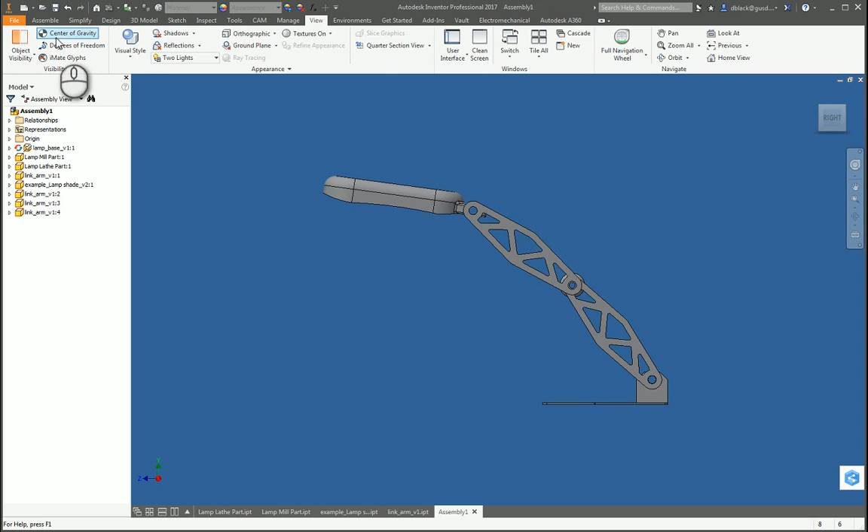It's under the View tab. View, center of gravity. It's out of date. Would we like to update? Sure. Okay, so it says the center of gravity is here. And you'll notice that's out in front of the base, which ends right here. So in this configuration, the lamp will actually tip over, which is not a good thing.

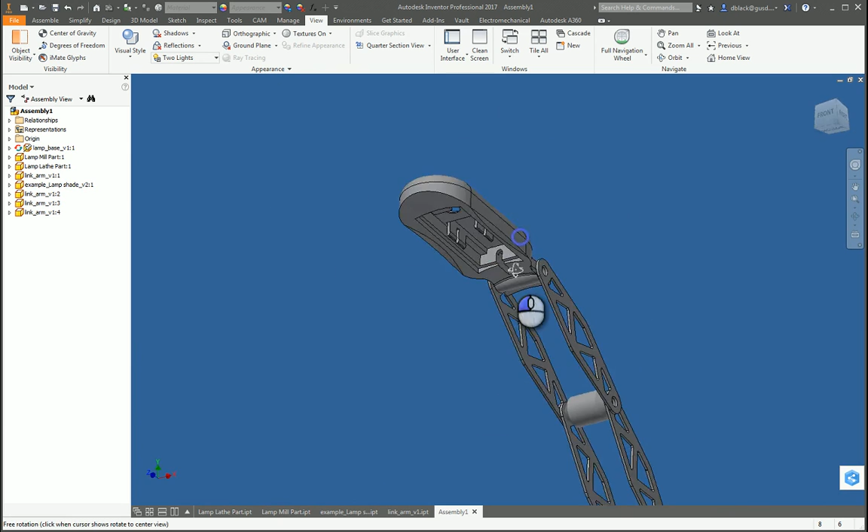However, you have to keep in mind we have not set our material properties. You do have some mass back here in this aluminum block, and that's also a reason to keep your link arms lightweight. Our 3D print, that's going to be fairly light, but the USB cord does have some weight to it. The LED module has a very small amount of weight. The 3D print is all honeycomb inside, so it's pretty light.

Your lathe part, though, does have some mass, so you'll have to set your mass properties to be accurate about that. But if everything were the same uniform material, that's a strange pose for our lamp. That's just because of our degrees of freedom. If we put it more reasonable like this, you can see that the center of gravity is well inside our footprint, so it's not likely to tip over.

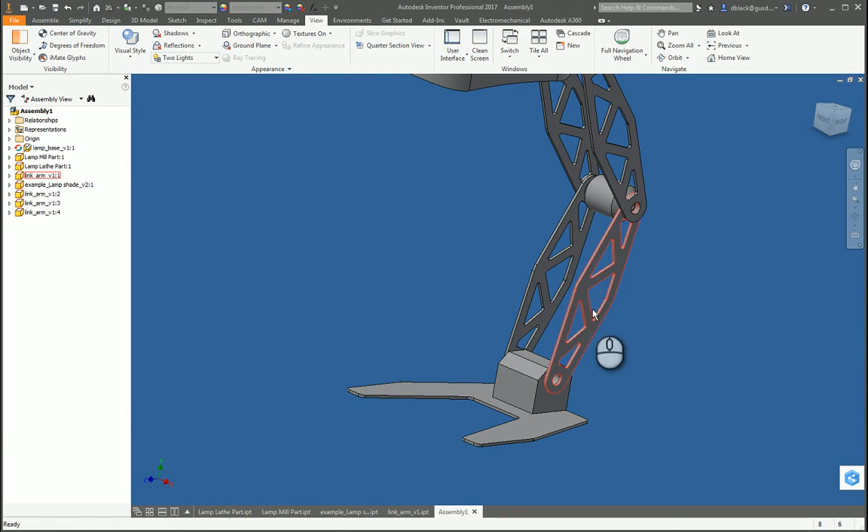Now, some of you might be asking, well, what about the welding project? Where do the welded parts come into this? You know, I was wondering the same thing. After I took out the center of this with my truss pattern, I realized I don't have a good way to join the left and right sides. There's not a lot of material left.

So what we might try is, this is 0.2 wide. So what I'm thinking is to actually make some plates that fit in to join the left and right sides, and we can get an idea of how that would look. Let's try modeling one. I know the width between those plates is 1.2. Let's start on the front. I'm going to start with a corner rectangle that is 1.2. And I'll bring this out a little bit more, maybe 0.75.

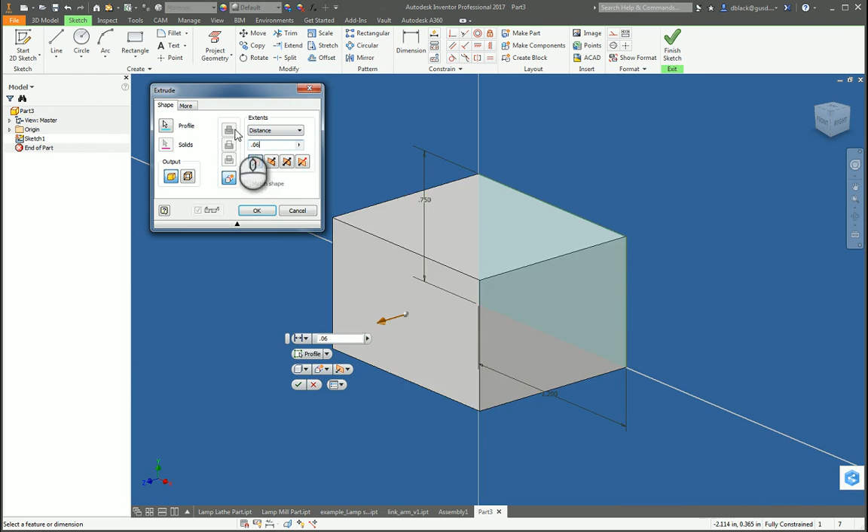And what we're about to do is going to really bring back your memory from the mini sumo robot design project, in which we did these tabs and slots construction. So I'm sketching back on it. Let's make that one rectangle. I think this will work out. I'd like to make the midpoint of that horizontal with the midpoint of my existing geometry.

And let's put a very small, a 60 thou. That's the thickness of the piece it'll be mating into. Let's put a 60 thou dimension on that. And let's say it's 1/2 inch long. And I don't recall, did I set a width on this whole part? 3/4. Okay, so we can extrude that back in positive space, so we have a tab on there. I want one on the other side.

Let's make a mid-plane between two planes, between here and, be careful about where you're picking, here. And let's mirror that feature across that plane and say OK. Now for aesthetic and for weight, let's do a little something. Whoops, wrong plane. Let's do a little something extra to this.

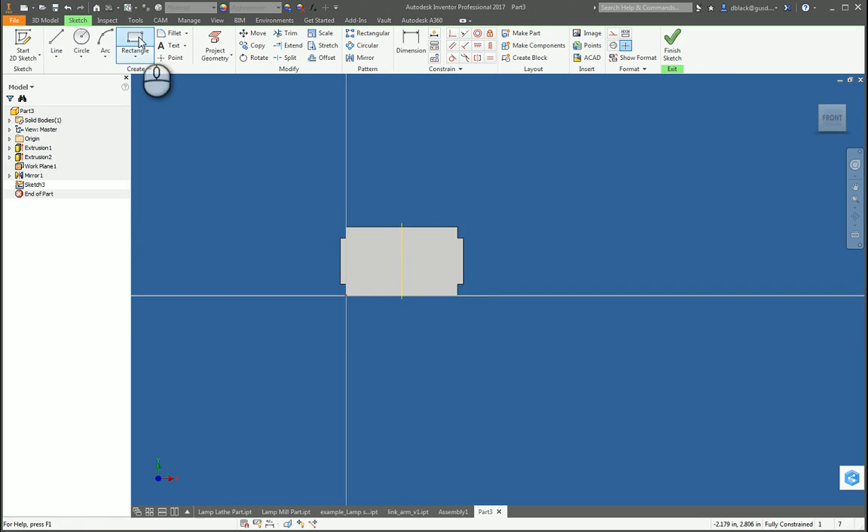Let's maybe project all this. Let's put an offset from out here. Ooh, that's interesting. If we go 0.2, we get something like this.

Let's go with that. That's not bad. Not what I was originally envisioning, but we'll keep it simple for this project. So I'm going to save this as my, let's call it lamp crossbar or something of that sort. Again, I'm going to go V1. I may change this later.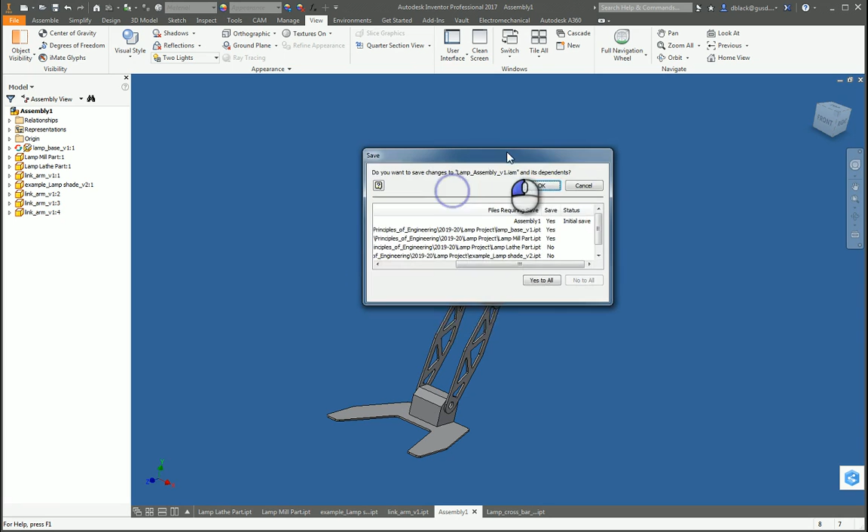So in our assembly, I realize I haven't saved it yet. We've done quite a bit of work. Let's celebrate with a save. Lamp assembly. This is my V1. Make sure you know what folder you're saving to. Most of the time it is fine to save all the dependents with the defaults there. Looking pretty good. Let's bring in, we'll tile our windows. Let's bring in our crossbar.

So I'd like this guy to live just right up in here. And maybe we do a few of them, and maybe it lives in a few places. And I'm thinking I should constrain this in. C for constrain. Let's orbit around. Let's pick that face there. That's sort of what I want. But we need to find a good spot for it.

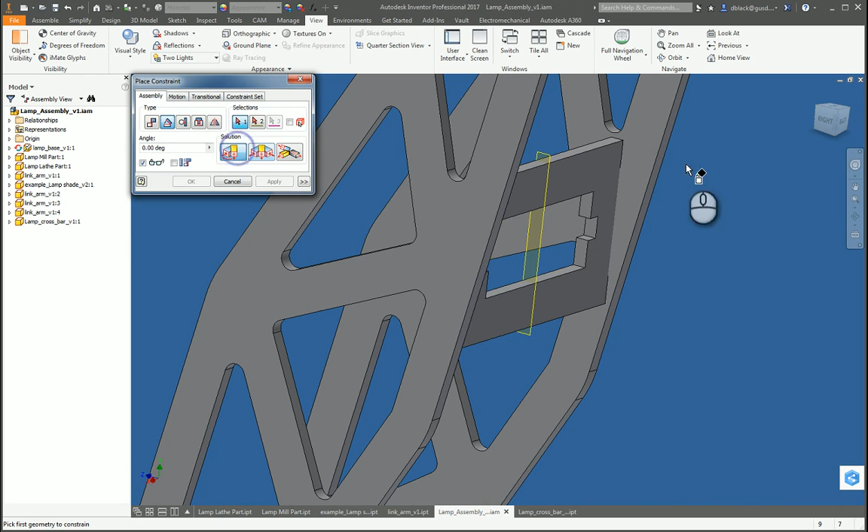So something like this, maybe 2 of them, maybe 4 of them if we really want to go all out on it. I am thinking the angle between the 2 faces as a directed angle should be 0 from here to here. And we'll apply that. So that's looking pretty good. I still don't have a perfect location on this. Let's sink it in from the edge. So if we were flush, we'd be at a 0 offset.

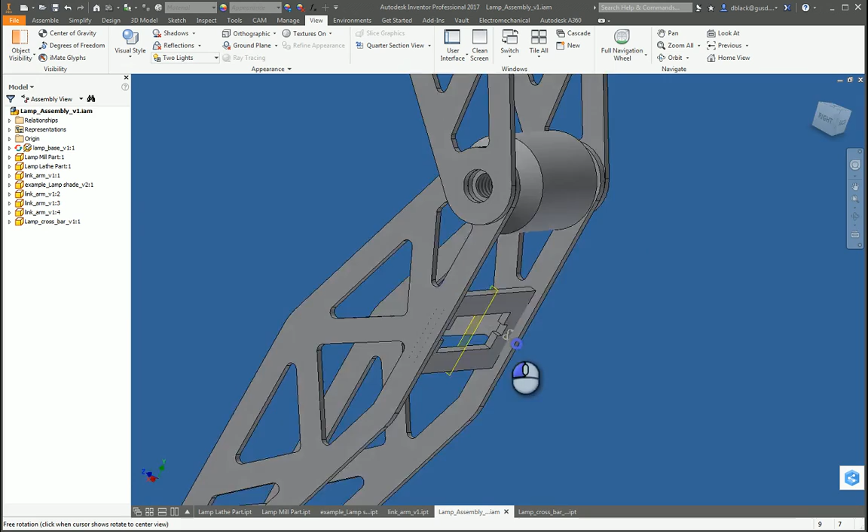Let's push it back. The laser is very precise, but let's push it back. Oops, that'll have to be a negative to get our direction. Negative 0.1 is a little far. If we wanted it perfectly in the center, we'd have to think about the math. We were 0.2 on the width of these arms. We're 0.06 on the thickness of this, so that's a difference of 140. So that'll be 70 thou on either side. And we'll apply that. So something like this looks okay.

Now I just need to position it this way. Let's put in a constraint from somewhere. We don't have a lot of good hard edges to constrain to. So what if we brought it from here to maybe tangent to here? That seems pretty reasonable. We could put a little offset to knock it downhill if we'd like. And apply. The biggest thing, especially if you're planning to do adaptive modeling, is to make sure that your assemblies are fully and properly constrained.

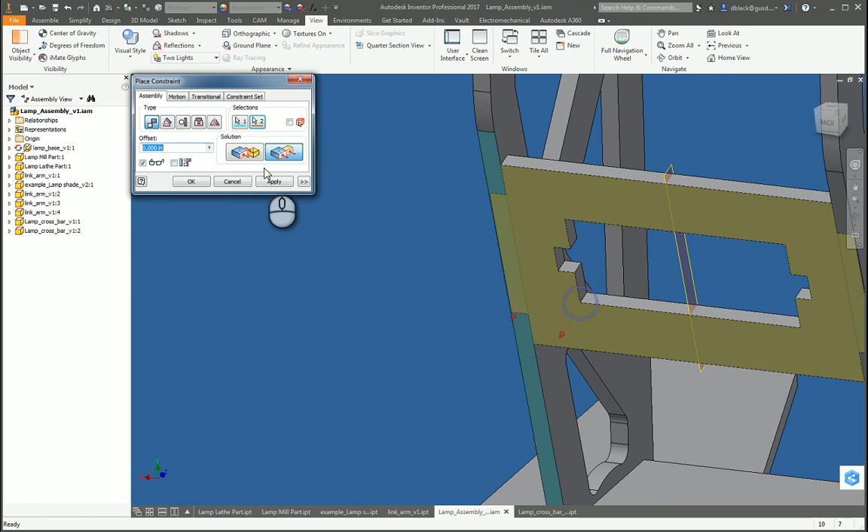So let's bring in, let's see, one more of those guys. So we'll copy paste that. Oh, there it is. Let's do the same thing. So lightning round now. We'll get the face of this guy, constrain to this guy. Looks good. We'll do a flush from the edge out here to the back right here at an offset of 0.07. I forgot to hit that as a negative. Let's find that mate and switch it to a minus 0.07. Typing on the keyboard. Looking better now.

Let's position this one. And I might just go off of, let's see, where did I go off of on the other one? We went tangent to that with an offset of 0.1. So let's try it. See? This surface tangent to that fillet with an offset of 0.1 and apply it. So that's looking pretty alright.

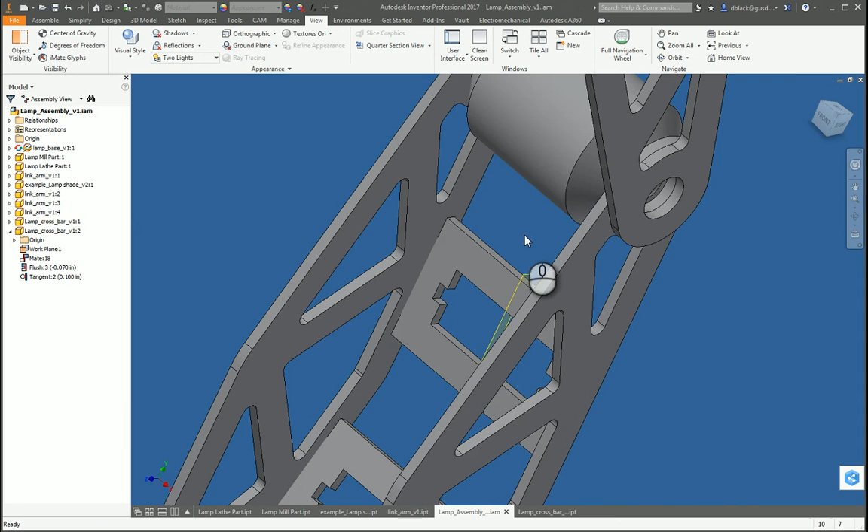There's no hard corners anywhere in this design, and the more I see it, the more I don't like it. So let's do something about that. I'd like to get in there, back to our crossbar. I could change that to just a rounded rectangle. In fact, I think I will. I was going to fillet it, but this sort of shape, it follows the tabs, but you don't really see the tabs when it's assembled.

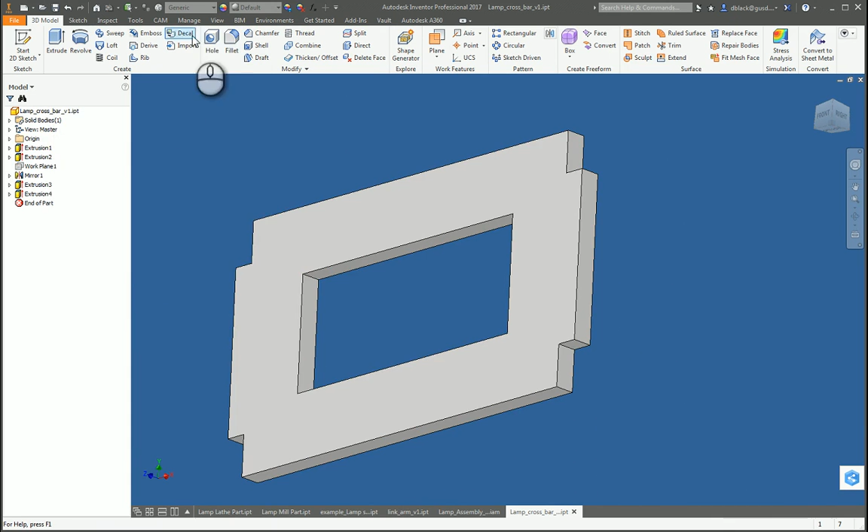So I'm thinking we'll just sketch on here. I'll project it. I'll bring back a rectangle as a 2-point. I'll extrude to fill these regions back in. And I'll come in and just put in 4 fillets in there. I'll turn off that work plane while I'm looking here. We don't need to see it. Let's bring those fillets in. Whoops. Deselect. Oh dear. Now we've done it. Let's try that again. 1, 2, zoom it, 3 through the back, and 4 through the back.

And apply it. Let's look back to our assembly and hit our lightning bolt to update. That just looks a little nicer. It still looks kind of chunky. We might want to bring it out a little bit for appearance. So that was back up here where we did that. Oops, let's see, was it here? No, we need to go back into extrusion 3 on this one where we did that 0.2 offset. Let's make it 0.15. Gonna open this up a little bit, make it look a little more sleek. You could certainly do something a little more fancy with the design, but I'm liking how it's looking.

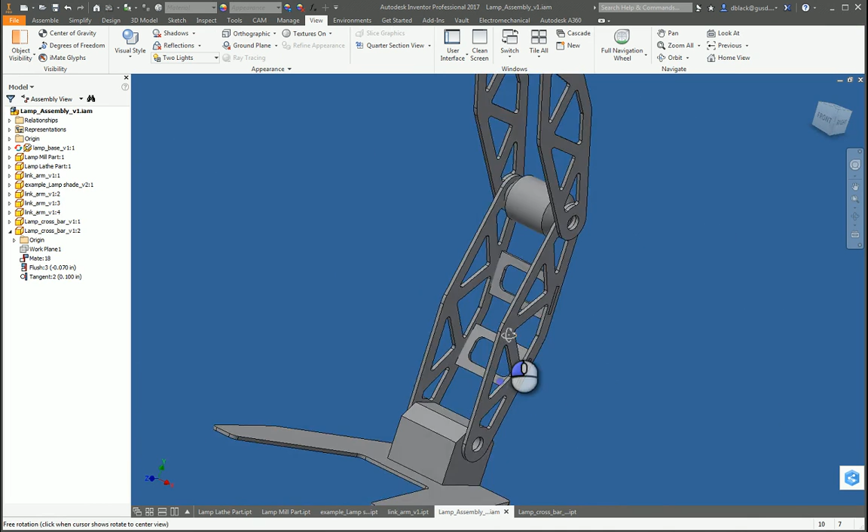Alright, last step. We need to just get that rectangle brought in to this part. So we'll adaptively model it. I need to close my link arm. I need to double click it in my assembly. So again, everything is constrained. Everything is locked down. Let's sketch on it. Let's project geometry.

You'll have to hover over to get them, one at a time, unless you model it where it's sticking through a little bit. You can cheat it sometimes by bringing it a thousandth or a couple thousandths through, but I had no trouble hovering over to get them. And we can extrude cut that out.

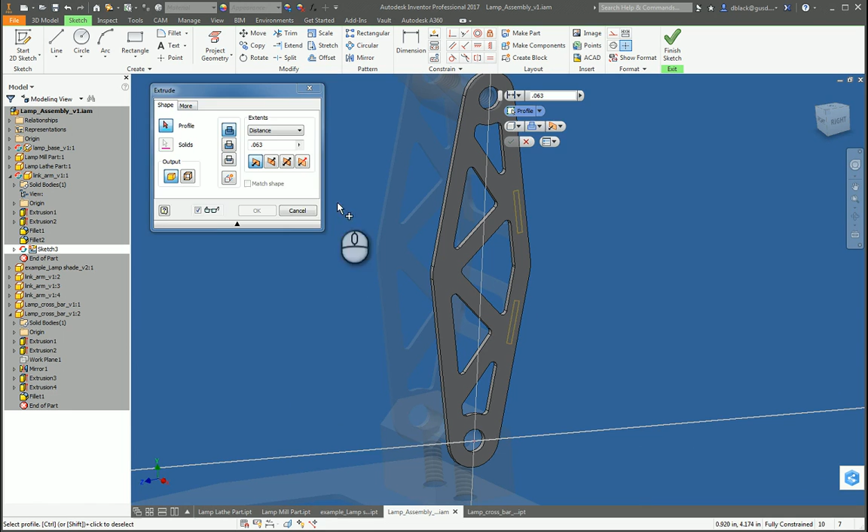What I'm thinking though is, for ease of assembly, the laser is so precise, I'm a little worried about the parts fitting together. So I'd recommend we do an offset on there of 5 thou, brought out 5 thousandths of an inch bigger just to be sure it's going to fit. If it's a little loose, that's not a problem, since we're going to be TIG welding over it. So let's do an offset of 5 thou on that projected loop, and now we can extrude cut them out.

I'd grab the inside first and the outside, or either way, outside and inside. Make sure you get the whole thing. Cut it through all. Looks good.

Important to note, this extrusion we just made belongs to this part. It is possible to make sketches and extrusions in the assembly, but strongly, strongly not recommended, because they don't make their way back down to the parts, and they won't show up in the DXFs we export.

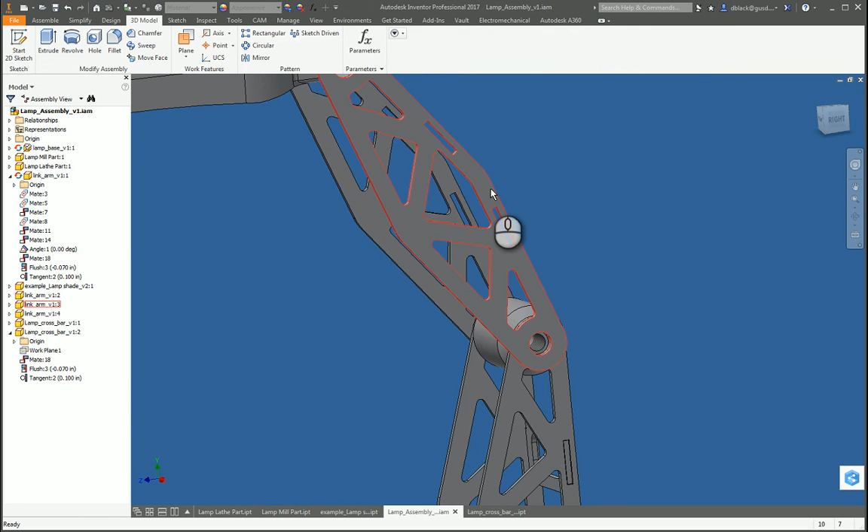So with that, you can see, since we're using the same link arm in 4 places, those slots we just made carry through in all the places, and it all fits. We have that 5 thou gap just for allowance for our manufacturing tolerance, and we'll go weld that in with our TIG welder after we produce this.

Now that we've boxed this in with those, if we added a couple more to the other side, it'd be much stronger. It'd be a real box. So I might recommend it, but we've taken very thin, very lightweight material and made it stronger with other pieces joining in, welded in into a box or a channel.

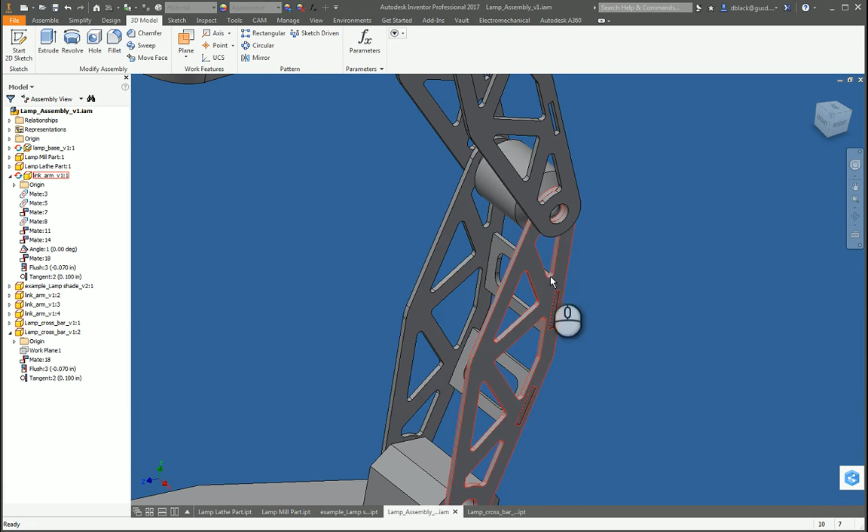Some of you were asking about bending the metal, sheet metal bending. That's a little out of the scope of what we're looking for and what we'll cover with the time we have, but I'd be happy to show you how if it strikes your interest. We would add a couple more of these up in here. Okay, so we would actually go to laser cut 4.

But we're at 1 hour on the video, so just 2 more points I wanted to mention before we wrap things up. You do want to make sure whatever the outer radius of your link arm is, that it's not running into your lampshade. You want to keep that separation there so that it can pivot. On mine, aesthetically, I'm not super duper happy with how the link arms come up above the 3D print, but...

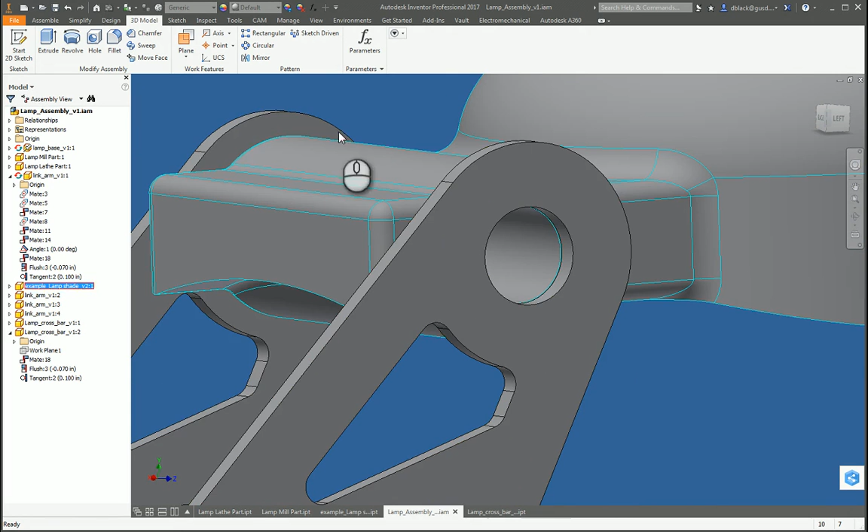It is what it is. I could go back and shrink those a little bit down to this height if I'd like, which I may do. With the lathe project, things are looking good in there.

That's about what we were going for. We'll have a couple bolts, one coming from each side in here. Don't need to model them, but you can put some if you want. Down in the bottom, we'll have one long bolt going all the way through and a wing nut or something of that sort on the side. We'll have a couple button head bolts up from the bottom.

You also want to make sure that the design of your link arm clears where your mill block is, that it's not reaching down so far that it can't pivot down here. But overall, this is our desk lamp.

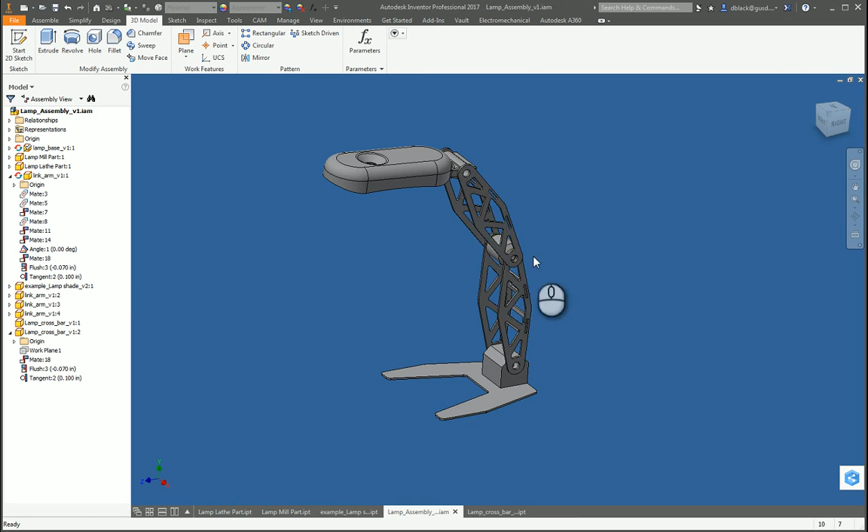So sheet metal sculpture's got the base, the link arms. You could do 2 different designs if you have time, but 4 copies of one design should work great. We've got the crossbars we just put in, our mill project, our lathe project, and our 3D print project, and hopefully a little bit of welding with our crossbars once we have them made. And this is a great looking lamp.